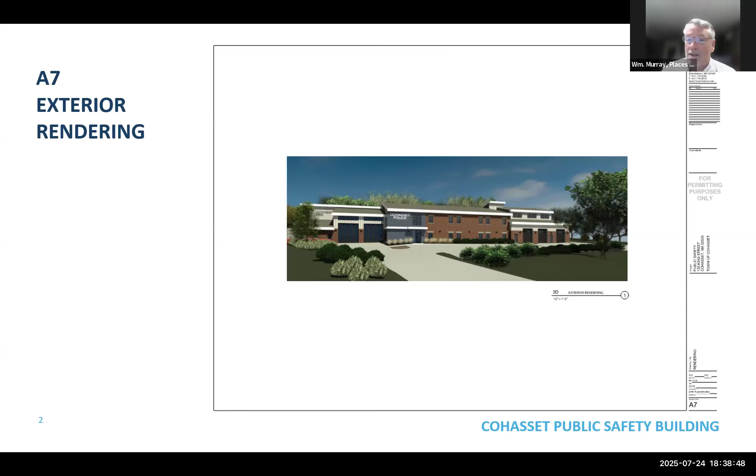Very quickly, some plan views just so you can get an aspect for it. On the left we have the apparatus for the fire department, the dormitories for the fire officers, and operational space. The first floor of the main building will be almost entirely the police department - this will be the holding, prisoner processing area, and the garages.

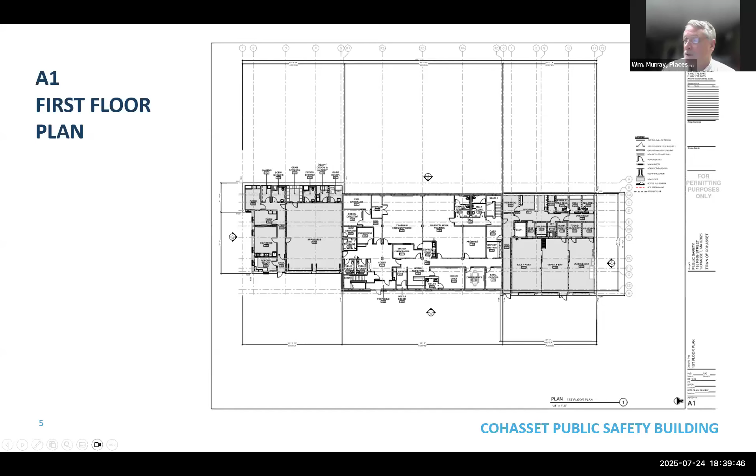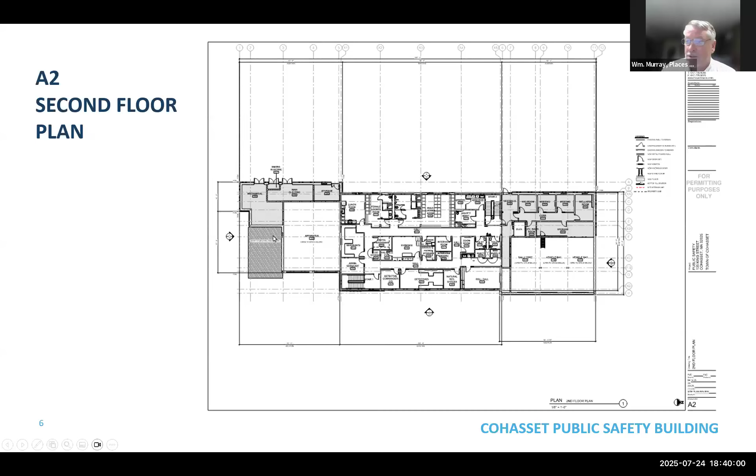The second floor will be various offices, and again the second floor of the main building will be police operations. There's virtually nothing on the second floor other than gray spaces, which are mechanical. There is a third floor on the existing building, which will be renovated, and that's the data storage center that the town will operate - just two very small closet/office spaces.

Here is the site plan. King Street is at the bottom. We're pretty much honoring and keeping the existing pavement that exists to the front of the building, which goes all the way out to the north side. We're putting some islands to give separation. This is all new construction.

At the top of the page, a new parking lot to the rear and a new driveway. In order to build this driveway, you can see this gray line - that's a retaining wall, and we'll have retaining walls on the far side of the building as well, because we're building into this very steep slope.

So the way the site design works out, the fire apparatus will be able to enter and exit - they exit straight down and onto King Street. The police department public parking will be in this area to the front. These two gray areas will be raised islands where we'll have signs, no entry. So from the garage space on the first level going around to the back will be all police operation and semi-secured space.

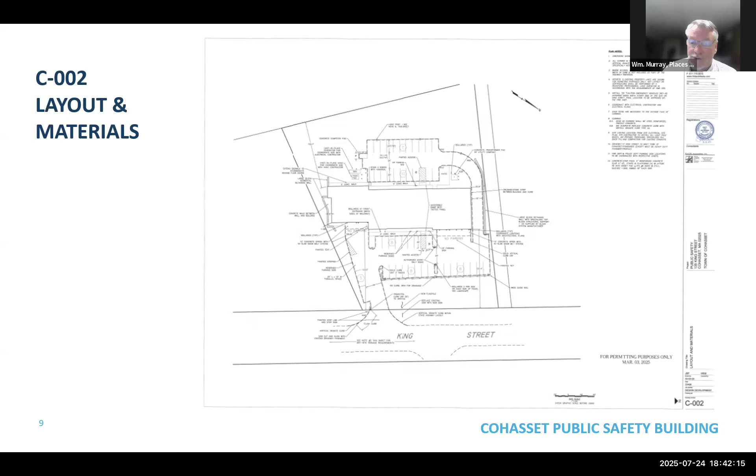The way the site works, I don't really want to get into the site design because it's very hard to read at this scale. I don't know if you all can see it. I think I'll just go back to the landscape plan, if that's okay.

So we are adding, not quite doubling the amount of impervious area - I think we're adding 68% more impervious area to the site, because the existing building is the center block and all of the pavement to the front. The new is the building on either end and the parking to the rear.

We have a lot of problems with this site with soils, and we did present to you that we were doing soil testing across the street, which by the way worked out very well. And we did stay outside the 100-foot buffer zone.

I'm a DEP certified soil evaluator, and I did the test holes out here. We did a couple of tests, three test holes to the rear and one to the front, and the soils were pretty consistent across the site in being a very dense till. I called it a silt loam, and groundwater is anywhere from 3 feet to 4 feet based on mottling, and we actually encountered groundwater in all the holes.

So the soil is not a forgiving soil - it's a very bad soil. It's a very good soil to hold up a building as long as you don't dig it up, but to try and recharge, it's not going to work. We attempted a percolation test and we abandoned it because it was just going too slow. So it doesn't perk - we have shallow depths to groundwater, and it's a very dense type of soil.

So in the drainage design, what we're proposing to do - and I will attempt to get to the drainage design - what we're doing is we're catching through catch basins on the site. But in this upper level, we're doing a below grade detention basin, which is to say these are going to be chambers that are going to be fully waterproof, wrapped in plastic, and they'll be below ground. So we'll be capturing stormwater, attenuating it in here and slowly bleeding it out and discharging to the existing drainage manhole that's down on King Street, because the entire site flows down to King Street.

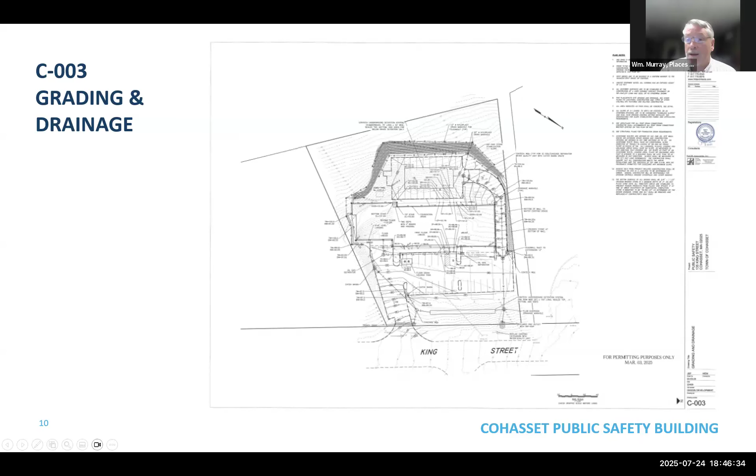So we did do pre-development drainage calculations. The building is here, and you can see that we took into account the offsite flow from what was formerly Avalon, all the tributary areas flowing from offsite. We did a site inspection, and we see that most of these buildings pitch to the front and to the road and are picked up by roadway drainage, but the back half of the building pitches to the ground and drains to the site.

So this is the pre-development drainage, and we have 2 points of analysis. We have a manhole right here, which collects runoff from an existing set of catch basins along King Street. And there's an existing catch basin over here that has a very small tributary area, and we've done an analysis to both of those points.

This is the post-development, so I'm just showing you that we've taken very careful consideration into the design of the site and the stormwater. For the storm events and the points of analysis, you can see post-development on all events, the flow is less than the pre-development circumstance.

And we do note that we cannot use low impact development techniques, which we do try to use on a lot of our public safety facilities, simply because there's no room. We have bad soils, and we just can't do open drainage systems or rain gardens or anything like that on this site.

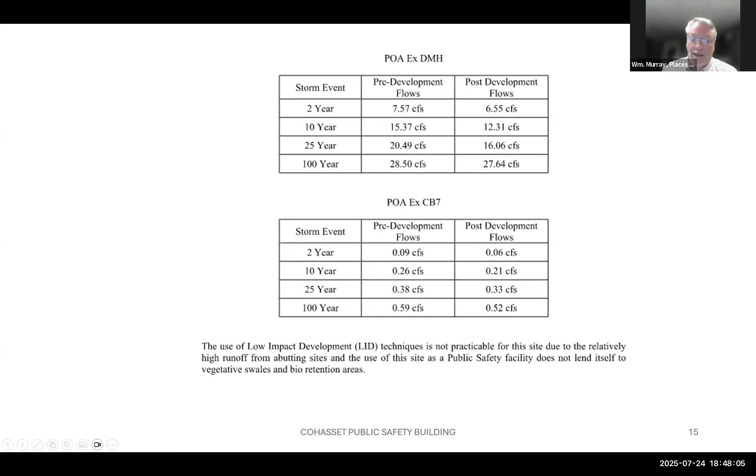So I tried to go through it fairly quickly. As I had mentioned, Charlotte has given us a very detailed set of questions that we already have answers to. This is a design team, so the answers are not generated just by my office, but by the architect, the landscape architect, and some of the other professionals. We will, in all likelihood, have a response to the commission next week for your next meeting to go into detailed response about O&M and some of the other items that Charlotte mentioned in her letter. But I'm happy to take any questions, and I know you have a long night, so I tried to keep it quick. Thank you.

Charlotte, care to elaborate on what your primary questions were?

I can summarize briefly that, as Mr. Murray mentioned, they are requesting a waiver of standard 3 given the lack of suitable soils for recharge. I had some other clarification questions on the rest of the stormwater standards, mostly like illicit discharge statements, and just clarifying that the site's not a land use of higher potential pollutant load site.

I had a lot of comments on the long-term maintenance. Since this is a pretty important public safety building, I just want to make sure all the maintenance is clear and put into the long-term O&M plan. If we can't get a CDS — I think it was a hydrodynamic separator, Contech I think is the brand — if we can't get that, if there's a similar one you recommend, that was one of my other questions. And then I went through each page in the site plan, and most of my comments, as usual, relate to erosion control, limit of work, tree clearing, and site construction management. That was pretty much it.

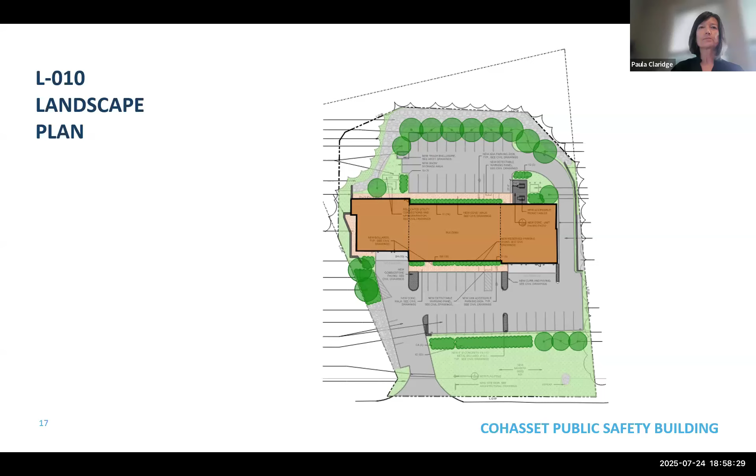Okay, next up we have NOI 25-18 for 30 Beach Street, which is new, so we'll read that in accordance with Massachusetts General Laws Chapter 131 Section 40, the Cohasset bylaws, and the Cohasset Stormwater bylaw. The Cohasset Conservation Commission will hold a remote public hearing on Thursday, July 24th, 2025 at 6:30 for NOI 25-18 to raise the existing dwelling within lands subject to coastal storm flowage and salt marsh buffer zone at 30 Beach Street for Susan and Michael Putziger.

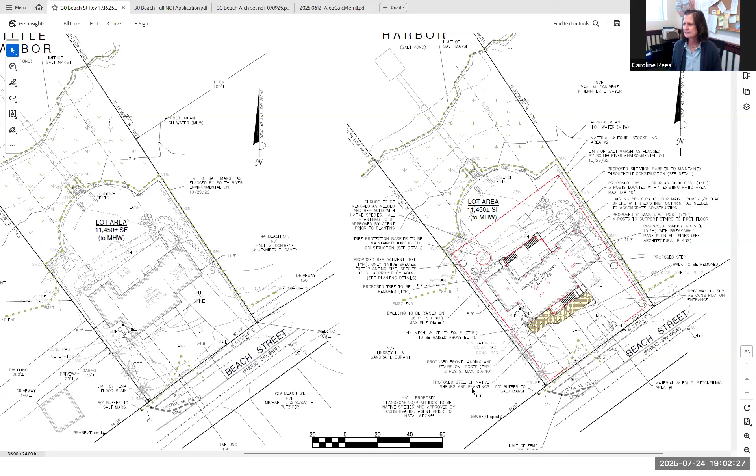They're not changing the shape of the structure per se, just lifting it up. It's keeping its same Cape style, not adding living space, just raising it on approximately 26 steel piles.

Some of the front hardscape will be removed. A front landing and steps will be added to access the elevated structure. And they are proposing a pervious deck off the new first floor, on concrete piles, set within the existing impervious patio footprint.

The raised structure will be surrounded primarily with vertical slats, providing 40% void spacing to allow flood flow to pass through. Under the garage area, there will be breakaway panels, and they propose to park a car underneath this section.

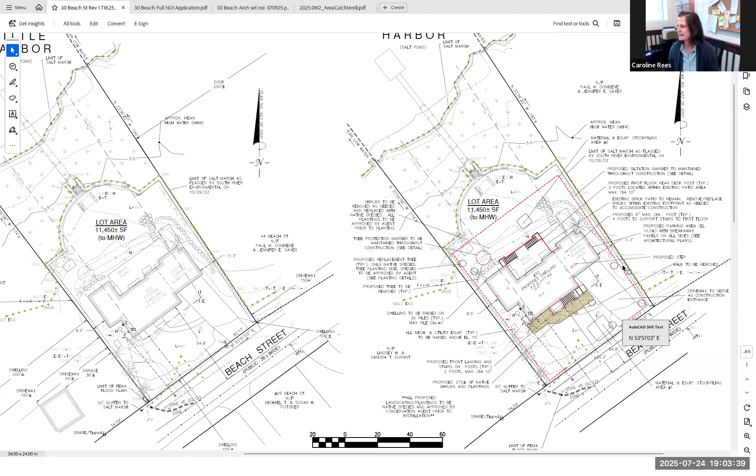To complete the work, we estimate 3 trees are proposed for removal. They're right up against the house. We're proposing 6 trees as replacement, scattered around the structure. They have not been selected, but we request prior approval from the agent regarding species and final planting plans.

And with that, I think I covered most of it. Pretty straightforward. I can show you a picture from the architectural set. The existing structure is coming up with slats and breakaway panels. And I guess with that, I'll open it to questions.

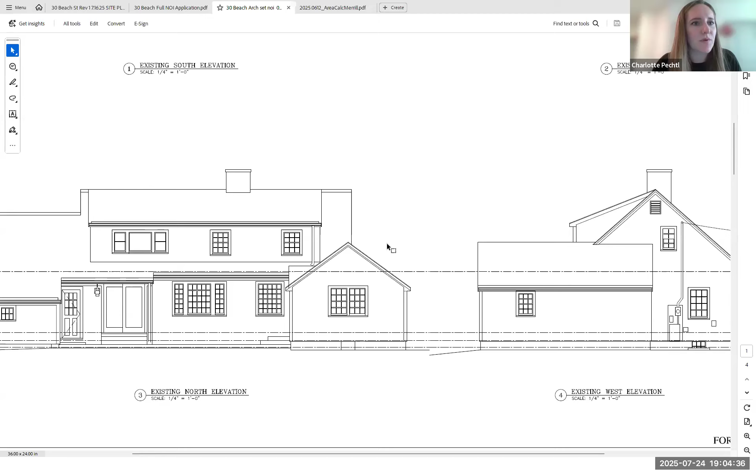Thank you. Charlotte, any initial comments or questions from your site visit? I wasn't able to make it to this one, but I have been to the site previously, so I'm familiar with what it looks like. As you guys may have seen on the site plans, there is an existing stone wall wrapped around the entire property from both right and left property boundaries and the one in the back.

The limit of work is proposed in that red line Caroline's showing, so they're not using the entire site. As you can see, pretty much the majority of the site is in the 50-foot buffer, so a variance has been requested for the work.

In terms of tree protection, we added a tree protection barrier around the existing tree in the back that they would like to keep. My comments would mostly just be on staging and stockpiling, making sure they're not storing things closer to the marsh than what's in the limit of work, even though I know it's a pretty tight site. So I did have some draft comments, or conditions, for that as well.

Mm-hmm. Okay. Tom, any questions? Comments? No, I don't have any questions.

I just commend the applicant for raising it above the flood level. I think that's really a wise thing to do. Kathy, any? No, I don't have any questions. Thank you.

Thank you, Steve. The only question was, this existing brick patio in the back looks like it's getting smaller. Is it just going away, or is it going to sit underneath the raised deck? It's staying the same size, it's gonna sit underneath. What's smaller over it is the proposed pervious deck, because there'll be a deck off the new first floor. So it's not changing at all, basically. It's not changing.

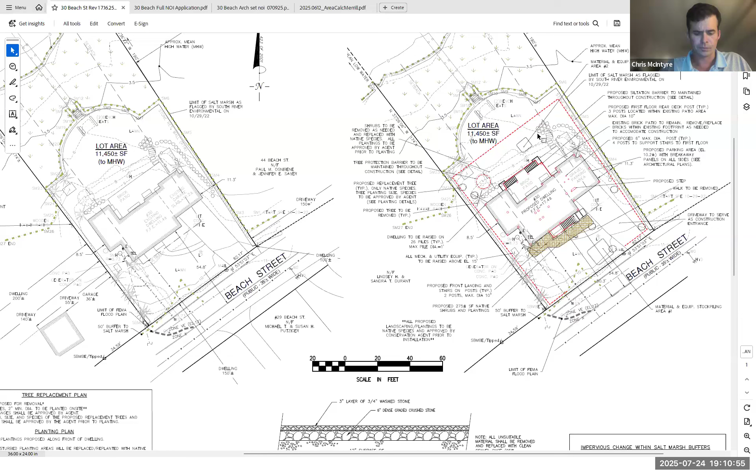Okay, Charlotte, did your drafted conditions have anything to do with the equipment? You want to pull those up? I don't have any further questions. Excuse me, may I ask one question? Oh, Kathy, I'm sorry, did I skip you? It's okay, I didn't have it before, but I just thought of something.

Caroline, on the site plan in the bottom right corner, there's a little box with the heading impervious change within the salt marsh buffer. Oh yes, I should have mentioned that. There's actually a decrease of 45 square feet. That's just the change in hardscaping around the structure. Of course, we have to still account for the roof of the structure.

So the impervious area from the dwelling doesn't change even though it's raised, but the removal of the front walkway and replacement with just a pad gave us a decrease of 45 square feet. Okay, thank you very much. Thanks for pointing that out. Sure.

Charlotte, if you would, show your draft? Sure. So, kind of what we briefly discussed, no staging or stockpiling of materials, fill, or equipment is allowed beyond the limit of work as shown on the site plans. So just making sure they don't use that back area for extra space because it's closer to the marsh.

Tree protections and limit of work shall be inspected by the conservation agent prior to any site work, including demolition, just making sure those barriers and everything are up first before the house starts getting worked on.

One thing I just wanted to note about the trees being preserved along the left border of the property, and then the rear of the property gets its own barrier. Sometimes with excavation, you don't know how big those root mass systems are, so just kind of anticipating if any additional tree removal should be needed.

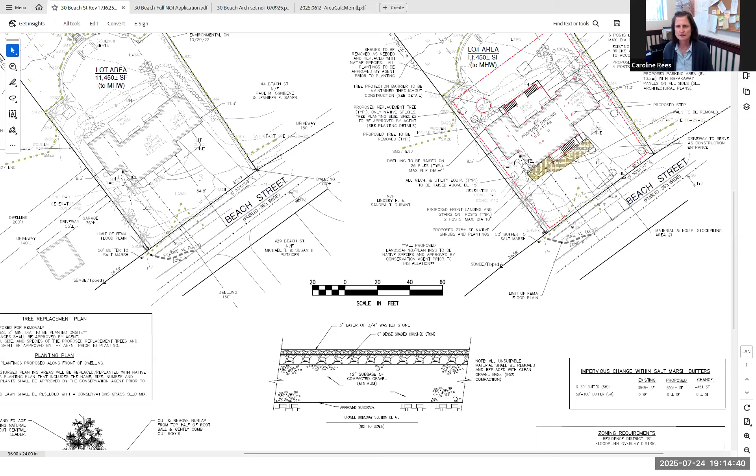Bear with me, I'll try to find the photos. Let me just slide over - I know I have one on my screen. That's not it, I'm sorry. It may just take me a second, I don't know if I need to pull them up in the file.

That's all right, if they're - that sounds like a pretty typical small coastal tree. I think I'm fine with 2:1, working with Charlotte to replace in kind at the 2:1 ratio, unless any other commissioners have any concerns or questions in that regard.

This is the tree on the right side of the property, so you guys can see it. Let me stop sharing - oh, that's all right Caroline. I shared over you, sorry. Yes, that's the one, they're all similar. Most of my pictures are of the marsh, but the one on the right-hand side I believe is an eastern red cedar. Sorry, I took most of my pictures of the marsh because this was a dock project two years ago.

So, what's the age of the wall structure on the three sides? Do you have any idea when that was built? It's kind of unique. I don't personally know, I don't know if the owners do - I'd guess it looks pretty old.

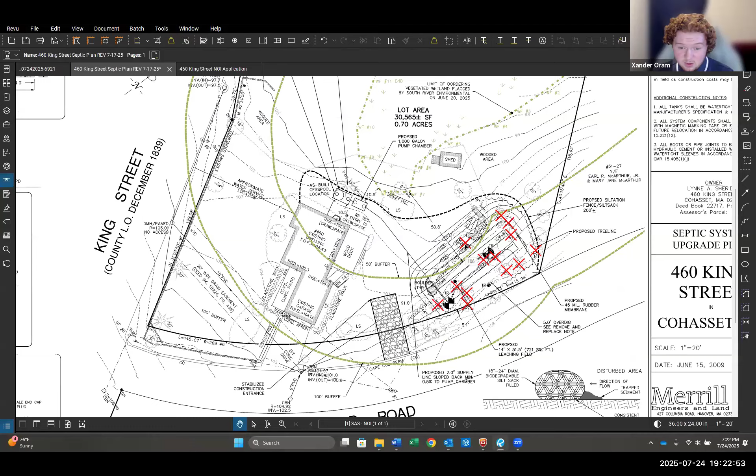There will need to be some trees removed, about 13 trees, unfortunately, but this is really the best and almost the only spot this can go, due to all the constraints. Keeping it out of the 50-foot buffer is obviously ideal. That's the way this project went, and that's why it was approved back in 2009, over 15 years ago. That's about it. If there's any questions, I can answer them.

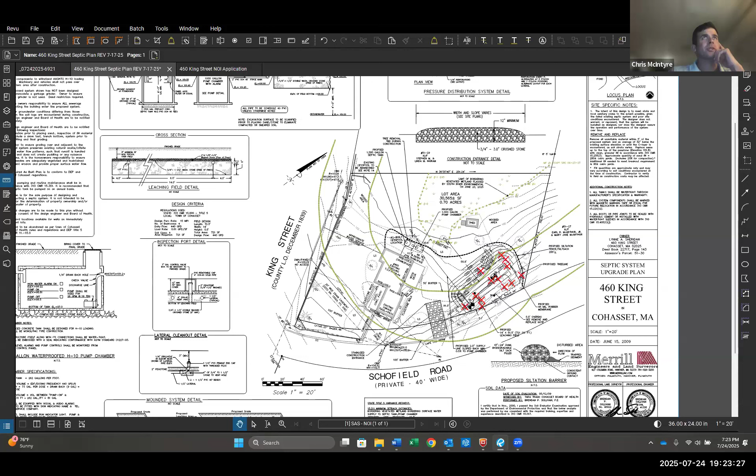Thank you. Thank you. Charlotte, what do you have for this one off the bat?

So as you guys know, they've requested a variance. I did go to this site and looked at it with Lynn, and as you guys can see, it's a pretty tight site. The soils up in the front did not perk, I believe. Xander, correct me if I'm wrong. Yeah, up in here, they did not perk.

So I guess my main question, and commissioners can weigh in here since you're the ones looking at this and voting on it: I don't know if it's a trade-off to either save the trees in the 100-foot buffer and move the leaching field further into the 50, since you can't avoid the 50 entirely, or if you're okay with them wedging it into this far corner as best they can to keep the work out of the 50. So it's more of a trade-off discussion: do we want to reposition it to save some trees, or is it okay staying in that corner as far from the wetland as possible?

I had similar comments on limit of work and tree protection barriers if we need them. It looks like they've already put the erosion control barrier around most of the trees I would want to protect, but maybe inching it toward that other smaller one where the existing riprap is. Other than that, those were my comments. Yeah, tightening this a bit. Yeah, we could do that.

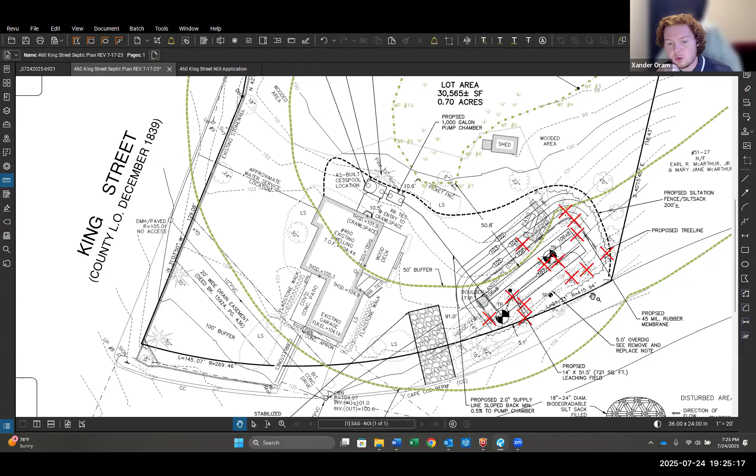13 trees. Yes, 13. Is there opportunity for replacement elsewhere? Probably, at least. I mean, some of them, I know you have usually a 1-to-1 policy, 2-to-1 in the 50, if I'm correct. It would just be a little, it might be hard.

That would be 15 trees. That might be a bit much, but I haven't had the chance to discuss that with Lynn, so I'd like to see what she would think, like how many trees she'd be willing to do.

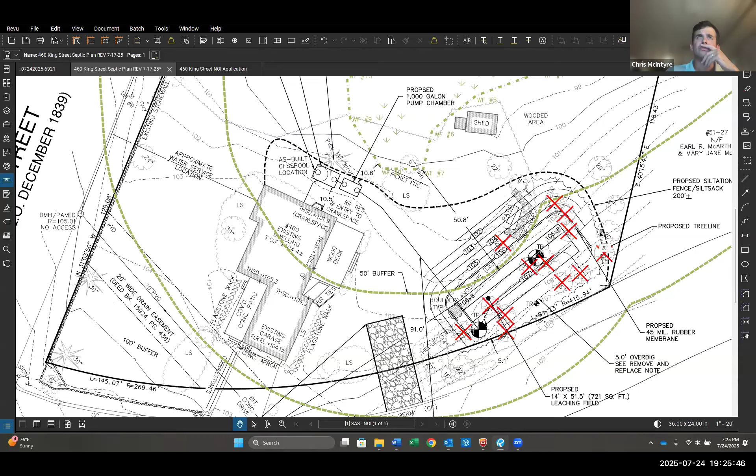So do I comment at this time? Sure, yes, if it is—I don't know, it's for the commission to decide. If it could come a little more forward, so not 13 trees are coming down, that would be my preference.

Yeah, it is heavily wooded as it is. I don't really know where we would put those additional trees. There's a grove on the side of the house, there's backwoods, and then there's the woods along Schofield Road. So I'm in a very heavily wooded area, which is lovely. I'm not quite sure where we would put in that many trees, to be honest. I just don't know where they would go.

Okay, basically the open area is the current backyard, and that is it. Everything else is woods.

Okay, let's go through the commissioners. Tom, any questions or comments? Yes, I think it's really essential that we keep this drain field as far away from the wetlands as possible.

And I think that this is really the only site that's going to work. And if we lose some trees here, I think that's better than trying to relocate it closer to the wetland.

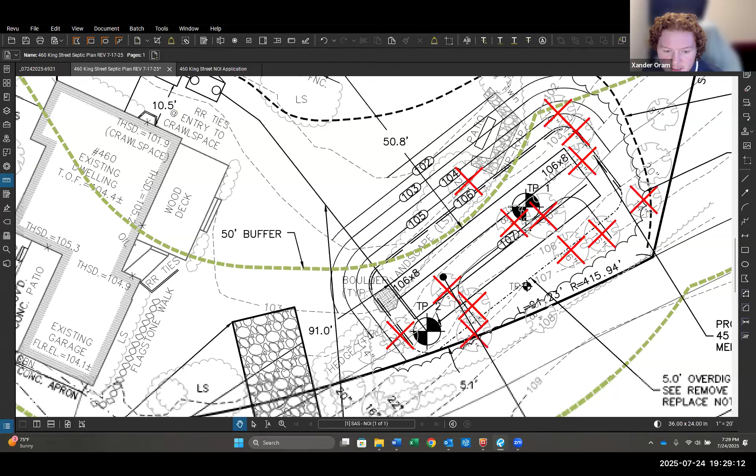Xander, do you have any details on the caliper sizes of those trees? Yeah. So I think the largest one we have is a 22-inch, and then it goes—we have a few that are 16, 12. I think that says 14, 16, 16, 10, 20, another 20 here. So 22 is the max, and it goes all the way down to like the 8-inch over down here.

Sanjay, any questions or comments? Yeah, once the leaching field's in place, what will be put on top? Like, will it be lawn or grass? Could we get some native species in there? Maybe some sort of seeding could be done. We'd just be careful about anything with a root system that could potentially penetrate the field.

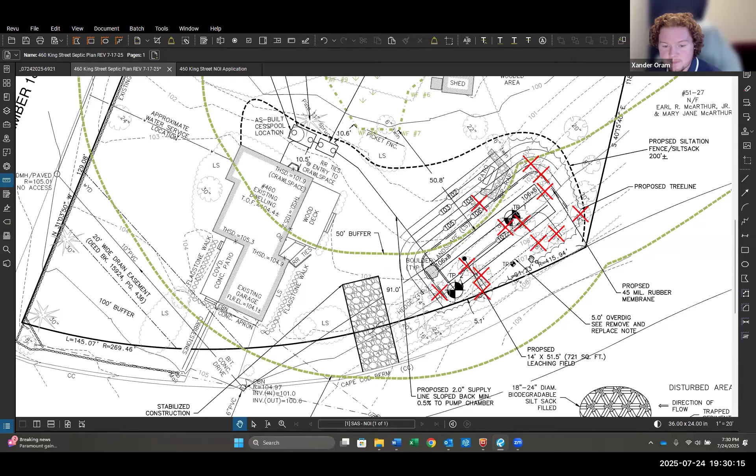So it might be hard. Lynn, were you planning on just putting lawn there, or did you have something in mind? My understanding was we should be careful with the root system, so it was lawn—that's kind of what I'm thinking too, we want to be careful with the root systems. So I think we were just planning to do lawn, yes.

Well, there are native species that would have shallow root systems, things like right on our list. So this could be—I think the conservation seed mix here could be used successfully without compromising the cover. Okay, so maybe just a seed mix above the system is what you're thinking. Yeah, that's interesting.

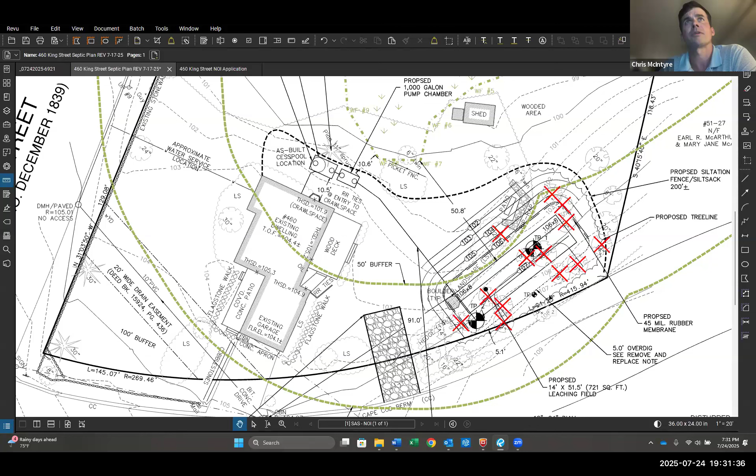Yeah, I for one would like to see some effort to plant trees elsewhere on site, whether it be within the 100. I'm trying to pull up the Nearmap, but just the way the plan is, I'm having trouble orienting myself. But it looks like around the shed there's open space for planting. Is that accurate?

Behind the shed and to the right of it is already well treed. There were a couple of trees that came down because they were no longer healthy, but it's all wooded from behind the shed—that whole area labeled wooded. It's behind the shed, to the right of the shed, all the way over to our abutters, and the abutters on the other side as well. There's no open land there.

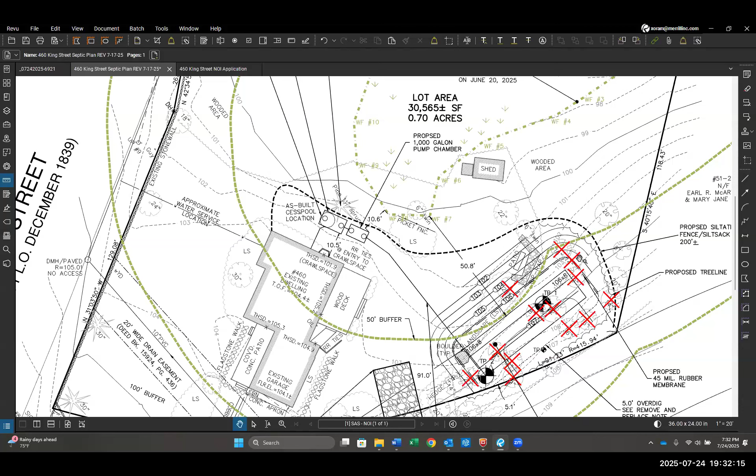Charlotte, can you pull up the project map as you have it in Nearmap, please? Just zoomed in on the plan as it is zoomed in.

I can't quite orient myself, but what I'm looking at on Nearmap from April 10th, 2025 looks like there's opportunity for some trees, and I understand this plan was approved. When did you say it was approved? 2009.

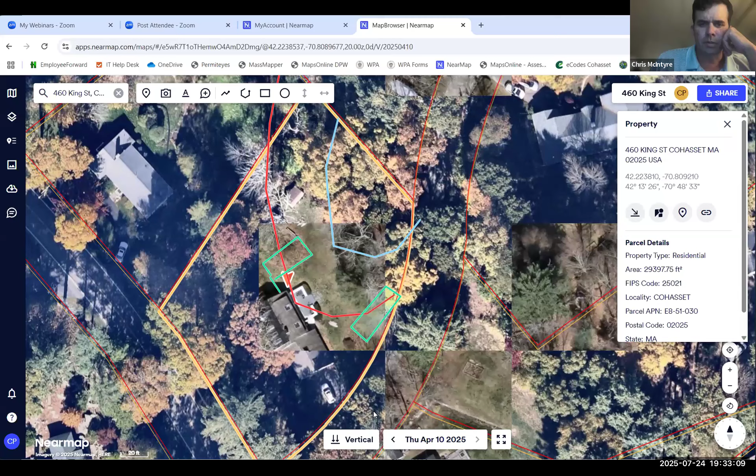Right, so I think our tree replacement approach has changed somewhat, and as this is now up for reapproval, we'd like to be as consistent as we can with tree replacement. So Charlotte, there's two squares here, and the one more southeast is the current proposed, right? So that's where the system they would like to put it?

Yeah, sorry, I was trying to draw this roughly. So this is the approximate location for the septic tanks, and this would be the approximate location for the leaching field. This isn't accurate compared to Xander's plan, I was just trying to draw it roughly.

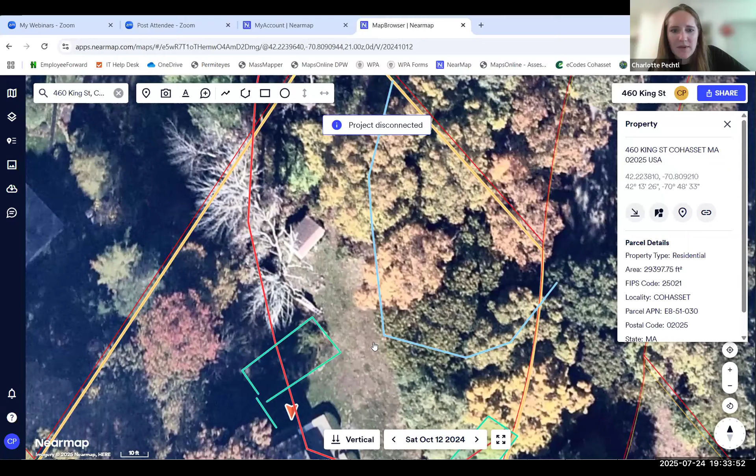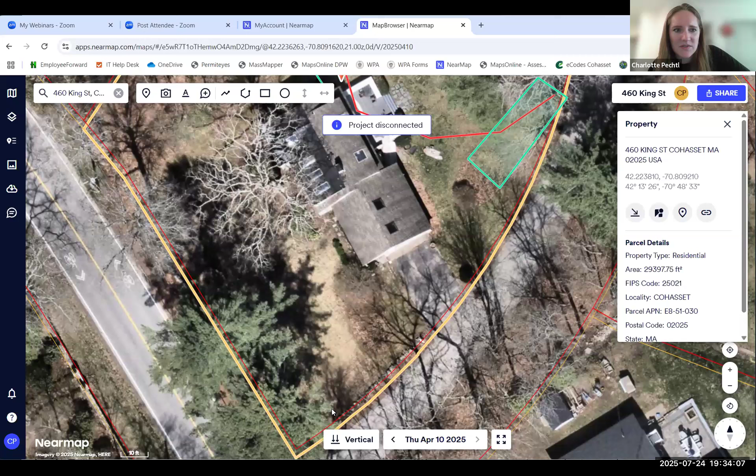Looking at the site, there are already a lot of trees here. So if this chunk's coming out, maybe shifting them into this corner might be possible. I'm trying to see if there's any space with canopy - there's a couple spaces right here. As long as it's not impacting any easements or utilities, they could possibly go in there. This area is still wooded, so I don't know how many trees we can squeeze in here. Maybe a little further out, but you'd have to be mindful of the tanks here, maybe back here potentially if we can find some space.

Charlotte, I can't see anything of what you're talking about. Oh, can you guys not see my Nearmap? All I see is the black and white plan here. Oh, I see it now, yeah, I can see it too. Not sure, I'm still looking at Xander's plan.

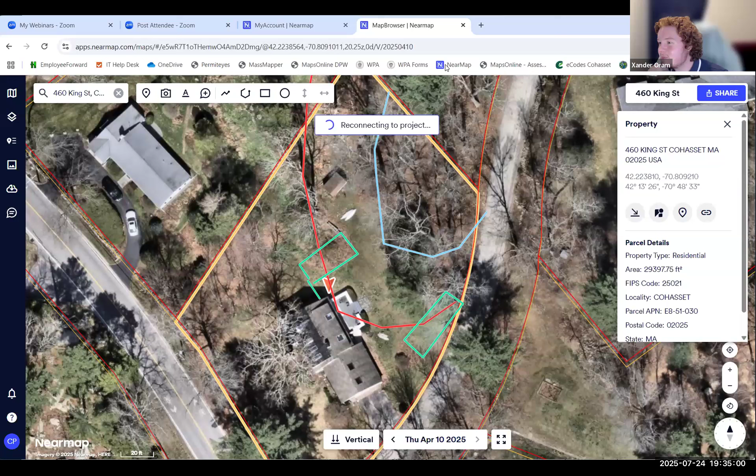Xander, I think multiple people are sharing. Would you be able to stop sharing yours? Okay, stop - does that fix it? That fixed it. Okay, sorry, sometimes with multiple people sharing I don't know how it works. No worries.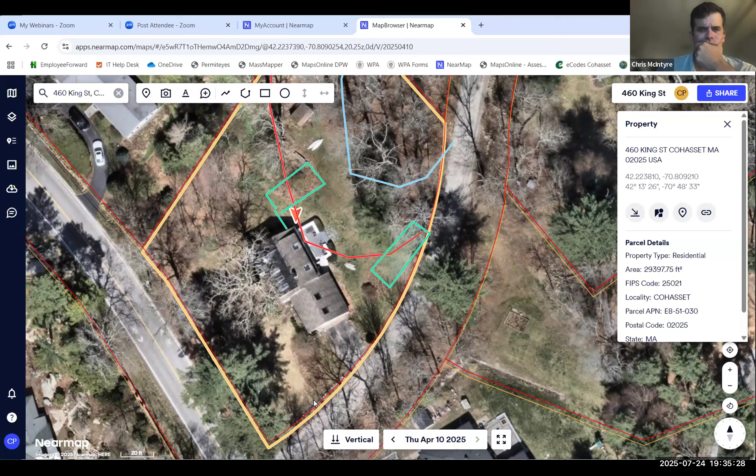I'm happy to work with you on that. Again, it's just that our strategy, our approach, maybe not our official policy, but we've changed a bit since 2009 in terms of our attitude towards tree replacement. So I'd be interested in exploring all opportunities to replace trees, and I think if the rest of the commission's okay with the applicant working with Charlotte on that, it'd be okay as well.

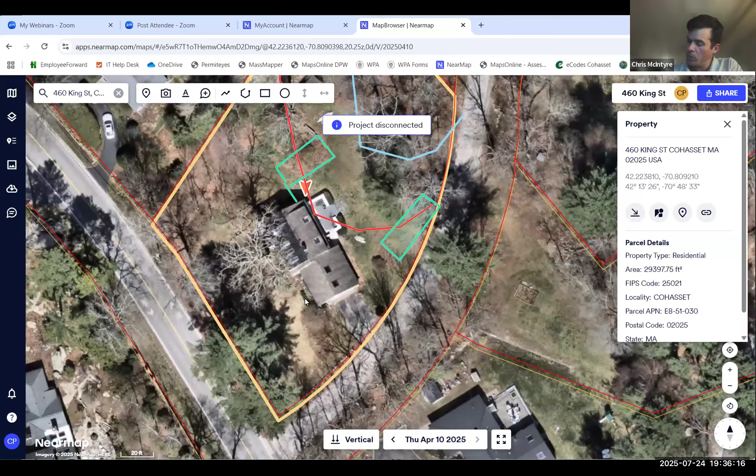Any other comments for commissioners? Questions? Nothing from the audience, Charlotte. What do you have for draft? I don't see anybody with their hand raised. No comments, but I can share the conditions I just typed or modified for you guys.

So the first one was: limit of work shall be inspected by the agent prior to any site work. Xander, if you're okay with tweaking the plan to just include that extra 6-inch tree, do you want me to put it as a condition, or do you want to just send that to me? Whatever works better for you. I can get that to you first thing tomorrow.

Okay, that's fine. Does the commission want a condition on tightening the erosion control just to protect that 6-inch tree, or do you guys just want me to work with Xander on that? Shaking your head, Chris - sounds like you're good. I'm fine with that, yeah.

And then native seed mix shall be selected to install in the leaching field area once the system is installed. The specifications of the mix shall be reviewed by the agent prior to installation. And I can send, Lynn, I can send you some examples.

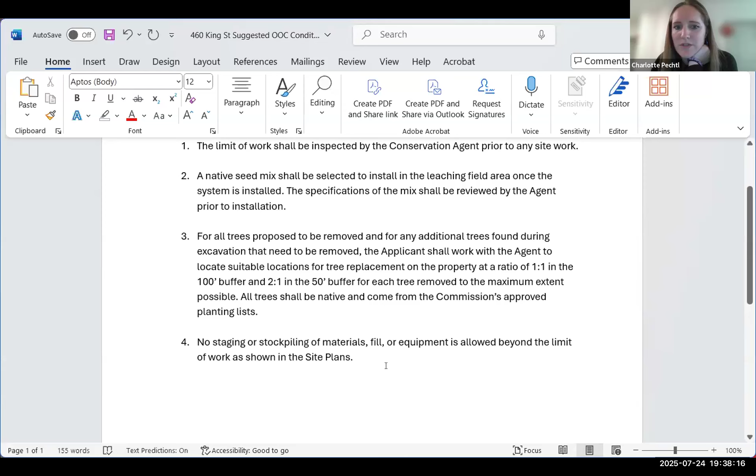And then same condition as the previous project: no staging or stockpiling of materials, fill, or equipment is allowed beyond the limit of work as shown in the plans. Just so we don't see people going around the barriers and putting stuff near the shed or something like that.

Good. Anyone care to make a motion then, if there are no further questions? No? Okay, then I will make a motion to approve NOI 25-17 for 460 King Street. Do I have a second? Oh sorry, Chris, is it with these conditions as shown or read? Yes, with the conditions as shown. Second.

Okay, then with the motion and a second, I will take a roll call vote. Tom Bell, aye. Steve Magnell, aye. Kathy Berrigan, aye. Sanjay Fernando, aye. And Chris McIntyre, aye.

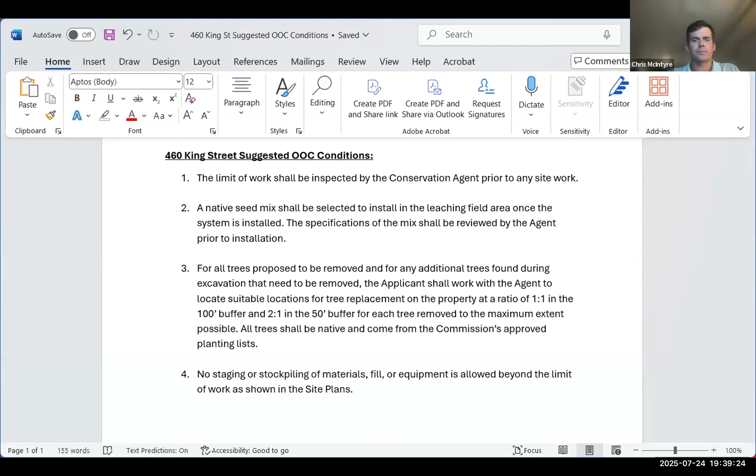Do we need a variance here, Charlotte? Yes, for the small amount of work in the 50, and then the obviously temporary disturbance during construction.

Right, okay. I make a motion for a variance within the 50 at 460 King Street. Do I have a second? Second. All right, with the motion and a second, then I'll take a roll call vote.

Tom Bell, aye. Steve Magnell, aye. Kathy Berrigan, aye. Sanjay Fernando, aye. And Chris McIntyre, aye. That vote passes 5-0.

Thank you. Awesome, thank you guys. Thank you. Thank you. Great. Have a good night. Good night.

Okay, is anybody else having trouble loading projects on their map? It's slow, yes. I don't know if there's some sort of network issue. I'm having trouble loading mine too. Okay, maybe there's too many of us on it. Usually that's not a problem. Yeah, I'm having slow loading speed as well.

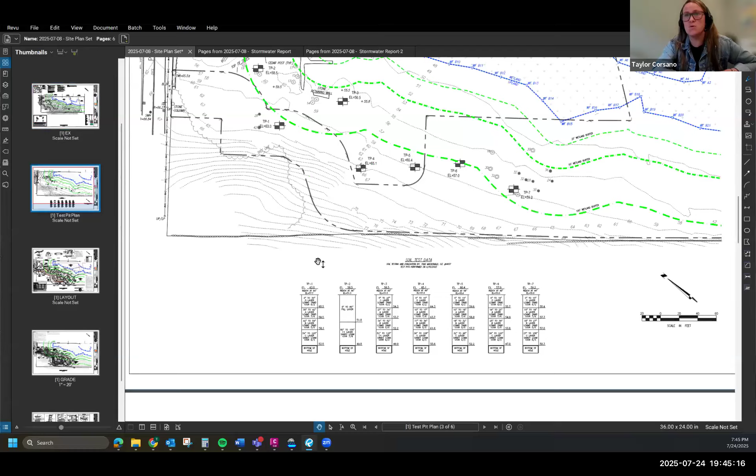The applicant is proposing 2 single-family homes, one located on 40 Pond Street and one on 46. The applicant is proposing a shared common drive to service both homes, proposed at 16 feet wide, which services 40 Pond Street with the driveway located here and 46 with the driveway located here.

We did submit a common driveway application to the planning board. We'll be in front of them in August, and we did just receive peer review comments back from them, so we will begin to address those as well as comments received from you all tonight.

The proposed drainage for the new driveway is serviced by 2 rain gardens, one located between the 2 homes and one in the front northwest portion of the site. This configuration allows us to better manage the steepness of the site by installing some retaining walls to flatten out and improve the steepness and runoff as you go down the site.

The houses are also proposed to coincide with the topography by having walkouts. To treat the roofs of the homes, we have 2 proposed underground chamber systems, just for the roofs, as well as some over here. We have proposed utilities connecting out to Pond Street, which will service sewer, water, and electrical.

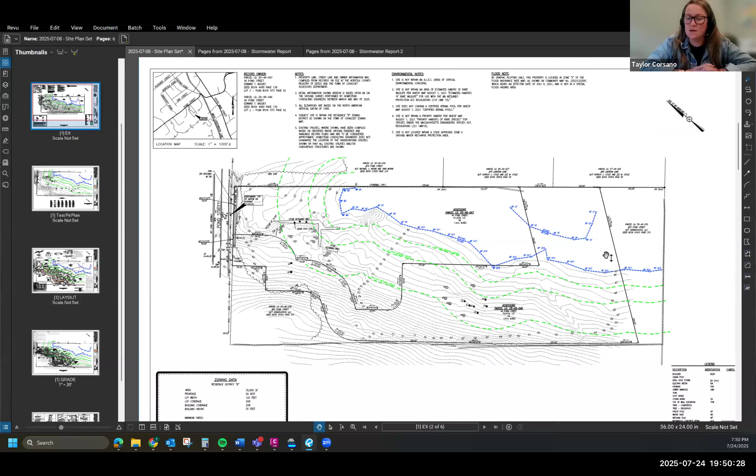So there's no tree schedule at this point, or? Not at this current point. We do have a couple of trees located, but we'll get you a more detailed tree schedule.

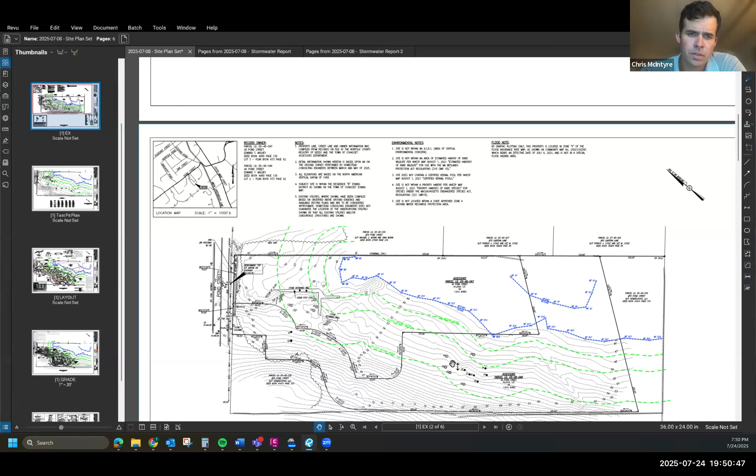Okay, Charlotte, what's the gist of the abutters' feedback? Can you speak to that? Sure, I'm not sure I can do it 100% justice, but I know the letter did touch on a review of wetlands, wildlife habitat, stormwater impacts. It seems like they are suggesting that we look at the potential impacts of all proposed structures, the driveway, the sewage, the infrastructure on the wetlands, water quality, and wildlife habitat.

Recommendations on preserving the area's ecological integrity, conducting a formal wetlands assessment of the properties at 40 and 46 Pond. They've also provided additional information related to humidity and impacts on severe storms. Overall, they're concerned about stewardship and long-term impacts on the site, and the project's impact on water quality, flood control, and wildlife habitat.

Given these well thought out comments, I had recommended to Taylor in a pre-application meeting, and also in my comments for the commission, to possibly consider two things. One would be a site walk. I have not yet visited this site, and I think it would be helpful to look at it visually since it's new development, to see where the flagged limit of work is relative to the 50 and 100-foot buffer, where the driveway and houses are going to go, and just seeing the site that's out there.

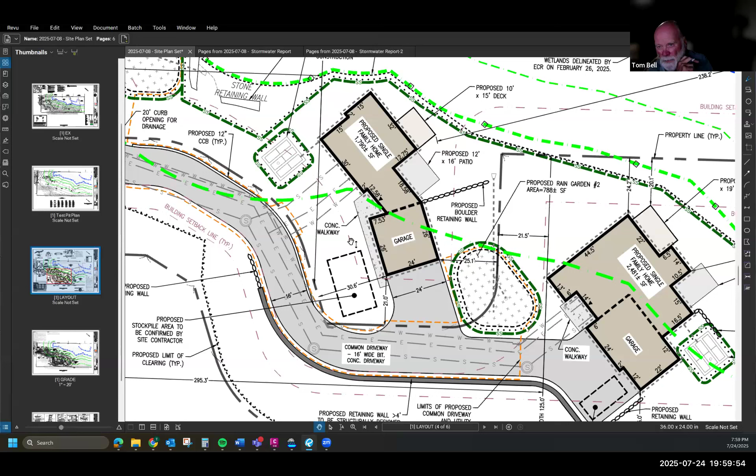For this one? For 40, that's correct. So 40 is pretty tight, as you can see - this is the building setback line right here. Oh, wait a minute, you've got another building setback line. So these are two separate properties, each with their own setback line. They just share a common drive. I see, yeah, to eliminate.

Okay, I wasn't paying attention - it's a confusing property boundary. Yeah, so the property boundary, the lots themselves are configured a little different - lot 40 is located a majority in the wetland. When was this lot subdivided into two lots? It was subdivided back in 2015.

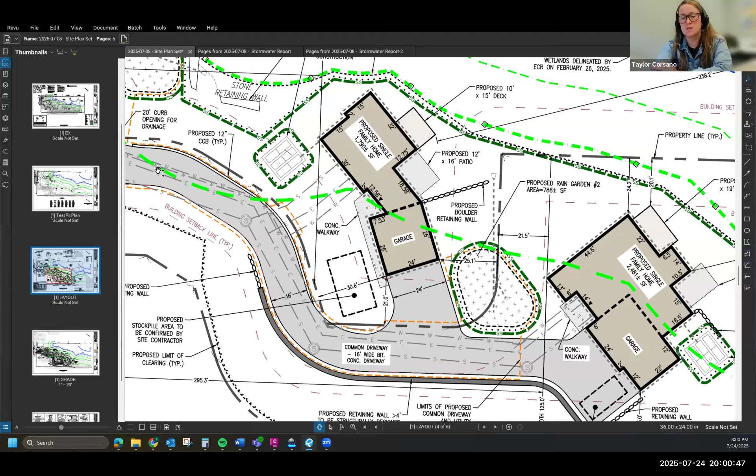So that's why the applicant is proposing the common drive, because on lot 40 we're able to eliminate a lot of the disturbance in order to get a driveway within the property.

Center up on that lot 40 residence again, please. Do you want me to highlight the property boundary for you? Oh, I can see it now, clearly. So I'm looking at the setback line and see what it's doing. Yeah, boy, it's really constrained. It is on this site - that's one of the main reasons the house was proposed where it was.

Okay, well, you've got a little bit of room there - you can move it somewhat out of the buffer. Yeah, I'd say it should be moved the maximum amount possible out of the buffer, consistent with your building setback. Yeah, on the side it is a little bit, and similarly the driveway crosses the 100-foot buffer, I guess on 46. Yeah, I do think we could look at a different configuration to try and push that driveway a little bit out of the buffer.

Okay, good. How wide did you say the driveway was? 16 feet, we're proposing, correct. Is that a minimum standard? I believe the minimum is 12 feet for a common driveway. We went just a little bit larger. So maybe you should consider a 12-foot driveway then - that'll help you. Yeah, we can definitely do that.

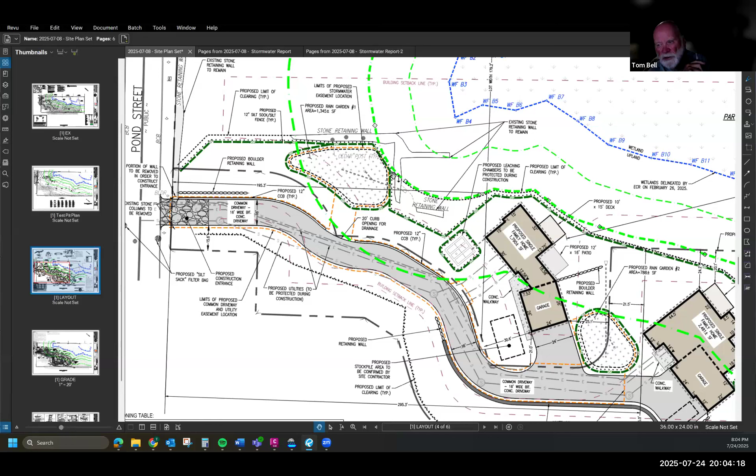Is it a retaining wall or an old farm stone wall? I think it's definitely more of the old farm style kind of wall that's been there for a very long time - basically where a field was cleared and it's a pile of rocks. No, it's definitely at one point it was well constructed. It's got a face to it and everything, it's a clear cut. During a site walk, you'd be able to clearly see it.

Okay, I'm all in favor of us going out and having a look at this. It's a complicated site - we're really talking about serious encroachments into the 100-foot buffer. So I'd like to go out there and have a look so I understand the constraints a little better.

You said the wetlands delineation was done in February? Is that right? Sorry, is that correct - oh, is my thing not working? Yes, you're correct.

Tom, anything else? Yeah, I'm just going to ask Charlotte whether this wetland was a potential vernal pool based on the state. Not based on the state. There is a vernal pool southeast of it on another property, but this wetland was not flagged by the state as a potential vernal pool.

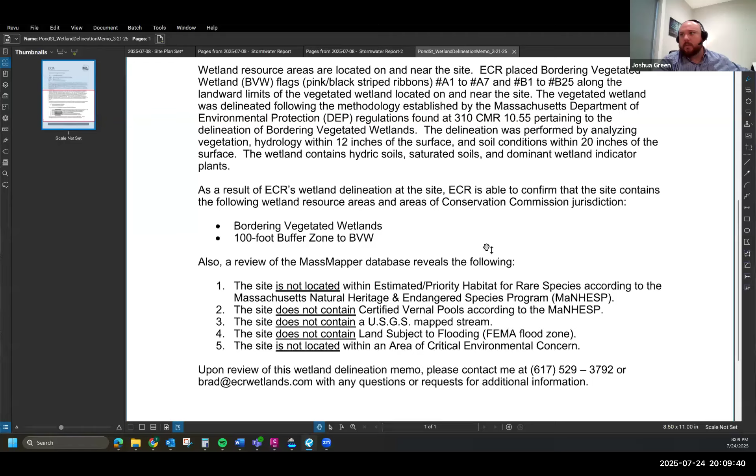And sorry, you're wondering about the soils? Really, the methodology for the wetland delineation, and if they evaluated the soils as part of that, and the soil type, to determine if it reflects the wetland. In the wetland memo submitted, he states he analyzed the vegetation and hydrology within 12 inches of the surface, and soil conditions within 20 inches of the surface. The wetlands contained hydric soils, saturated soils, and dominant wetland indicator plants. I think it's being shared now. Thank you.

I think Tom asked many of the questions I would have about building in the buffer zones. It looks like there's a fair amount of area still within the building setback lines, and I believe driveways can certainly be closer to the property lines than shown here. So there seems to be some opportunity for reorienting things so they're not in the 100-foot buffer. We've probably got most of the housing within that buffer, and it just seems a bit much for my taste.

Agreed. Thank you. Anything else? I agree, I think Tom did a good summary.

I would echo that. For myself, I'd like to see as much alternative consideration to removing structure and driveway from buffer zones, exploring the setbacks. I don't know if there's a setback from side lot lines for driveways in Residence Zone B, but there is. Just making sure we're looking at that closely and getting out of the buffer zones as much as we can.

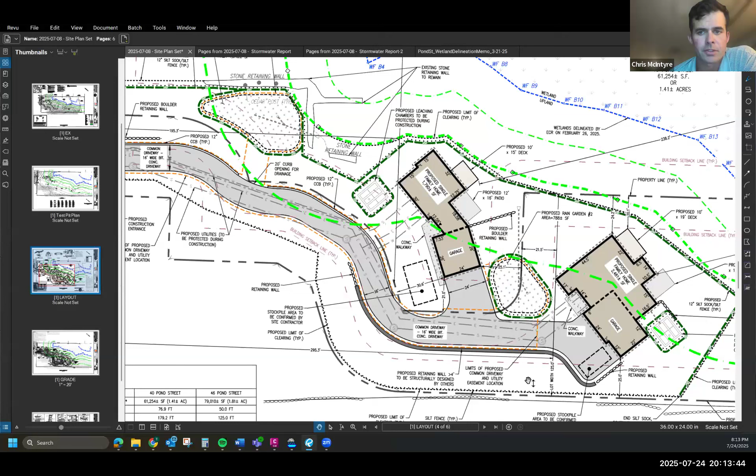Sometimes it's a safety issue too, like if it's an undisturbed site, owners may not be comfortable with that. But if the commission is okay with just our standard site visit setup, that means no deliberation on the site, and all the input would be brought back to a following public meeting, like this one. I think that makes more sense for this.

I have another question. What zoning district is this in? Believe it is Residence B. RB, so it looks like your side setback is 20 feet. Correct, your side and rear is 20 feet, not 30. Oh no, I was saying the driveway itself today is located 30 feet away. I misunderstood you, the setback itself is 20, yes. Yeah, that's the building setback, but it's not the driveway setback. No, I don't think there is a driveway setback, but I can confirm that.

Yeah, there is, I think it's 5 feet, but it might depend on the zone. It is 5 feet. In every zone? Yeah. Perfect. I would confirm that, but thank you.

All that information would be, let's have that all clear, and that way we can all be on the same page and maximizing our proximity to the neighbors and not the wetlands. So...

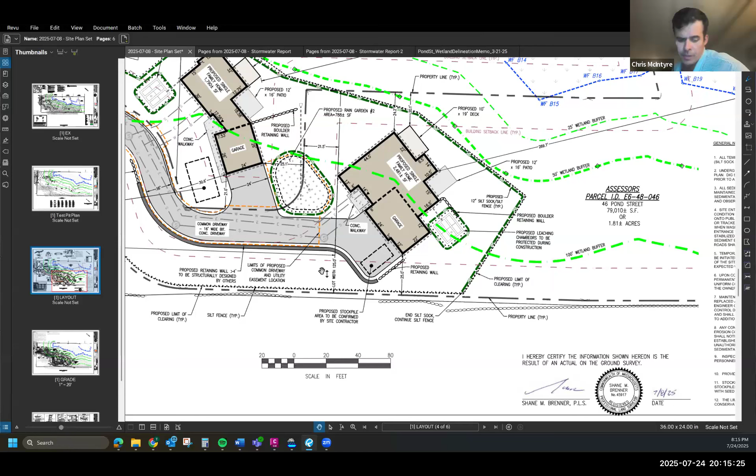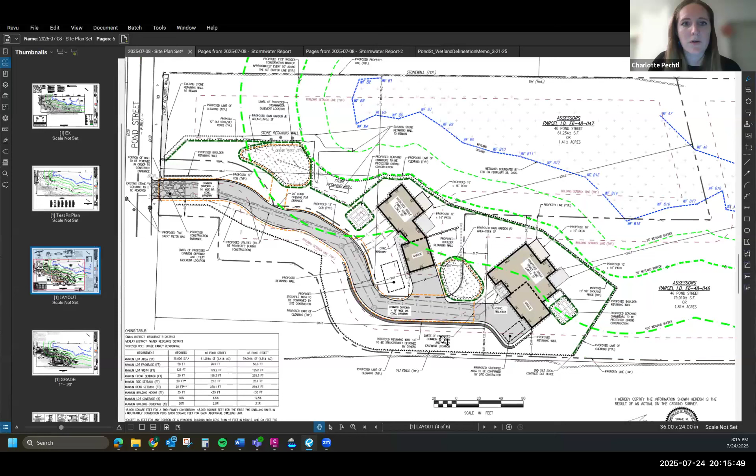Looks like there's a comment, Charlotte, in the Q&A. Yeah, so I think some of the neighbors did have questions. I don't know if the commission has any additional input, or if we want to move to public comments. Anyone, commissioners? I don't have anything else at this time. No, neither do I. Okay, and I actually do have someone raising her hand, so it might just be easier to allow her to speak, if that's okay, Mr. Chair. Sure, okay.

Hi, Mary Jo. Thank you very much for acknowledging our concerns in the petition. My name is Mary Jo Larson.

I live on 12 Virginia Lane, and our property pitches into the ravine. I see there's a recognition that there are many slopes, a downward slope throughout this area. So we really see this as a ravine.

I'm grateful to understand that 50% of the 2 lots is actually unbuildable. It's interesting for me to think that we're still going to try to ambitiously put 2 houses, 2 garages, and a 200-foot long common driveway into an area where there was just one house before, and that house has been remodeled, but that isn't my comment.

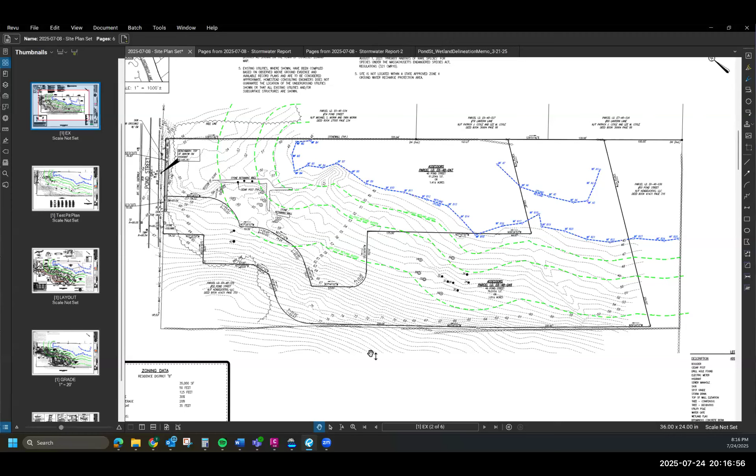I'd like to draw your attention to the image that shows the retaining wall that is behind lot 46, the house 46, that thick retaining wall. I don't know how long that is, but just to give you insight from the perspective of a neighbor, that

area behind the retaining wall is steep, sometimes 45 degrees steep. So we're all up on a hill. My main point right now is to focus on that retaining wall. That 4-foot wall will pose a significant risk to our property at 12 Virginia Lane, and possibly to our neighbor's position downstream, because our home is situated on a sloping hillside.

When you come visit, you should also take a look at Virginia Lane, where I don't see a great deal of care in trying to contain water runoff within the lot lines. I'd like to ask you to draw back your lens and look at the wider context, because our home is situated on a sloping hillside during severe storms, such as the 4 to 6 inches of heavy rain that just closed sections of I-93 in July and stranded cars.

Stormwater runs from Virginia Lane and pours down our long driveway into our backyard and right down into that ravine. Right now it's a ravine, and in summer it's probably much more flooded than in February. My major concern for ourselves and our neighbors is that when the water comes rushing down, that 4-foot wall, however long it is, will block the natural flow of rainwater from our driveway or driveways into the ravine and watershed, especially during severe storms.

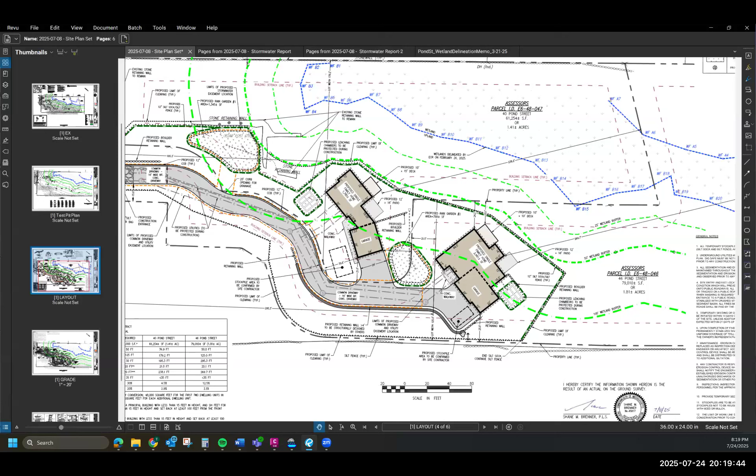Thank you. Yeah, we'll certainly look at that, because the topography on the plan sheet is not very clear in this plan, which we will look at. Thank you. Is that better? Yes, thank you.

I could chime in a little bit to maybe alleviate some concerns, but it is sloping down, so there would be no effect on abutters at the top of this hill, as everything is sloping down. That's what these stormwater systems are designed to handle, that stormwater flow coming down the hill.

And where will it go? Well, it'll come rushing down. By the way, there's erosion from that water going down all the time. So if it creates a river, it's going to start going downhill for sure, rushing downhill, and it will erode the area.

There's a steep incline behind our home. It's a major concern for us. I plant trees on our property to protect it from the degradation that comes with heavy rain. So it is a risk to us, for sure.

Yeah, sorry, I didn't mean it's not a risk, I was just trying to alleviate some of your concerns, hopefully. But just to note, on your letter there wasn't any contact information. I don't know if you want to provide that to Charlotte, because the applicant is happy to meet on site too, to discuss some of these concerns with you.

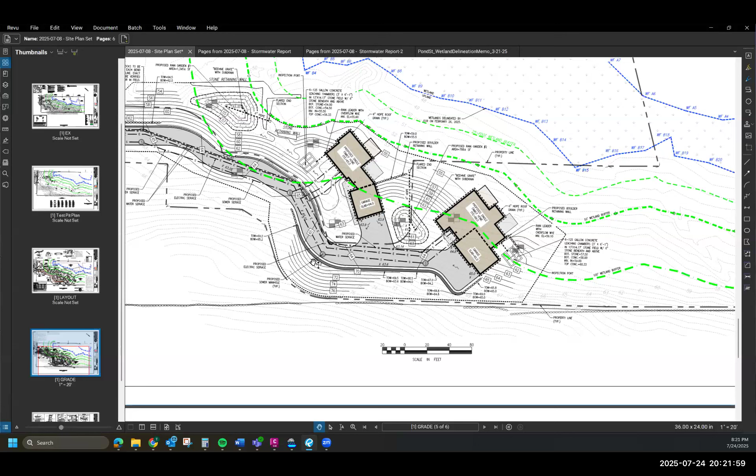Any other commissioners have any questions or comments before we continue?

I don't have anything else at this time. I don't know if it makes sense to have a specific date in mind, but we should certainly schedule a site visit. I think maybe we do that and then continue. Is that okay with the applicant? I don't know how much time we need to flag what we've requested, and Charlotte can specify what we'd be looking for.

I was going to ask Taylor, I can send you a list of the information we'd be looking for. I think Chris and Commissioner Tom both wanted to see inside that limit of work, seeing which trees are also coming out.

So given that list, which I can send you, do you think you need more than a few days? If you guys need a little longer to set that up, I'd recommend we continue to August 7th, and we can always move it to the 21st if we have to, or if you're comfortable just playing it safe, continue to the 21st, given the time to set up the site, have the visit, and revise your plans.

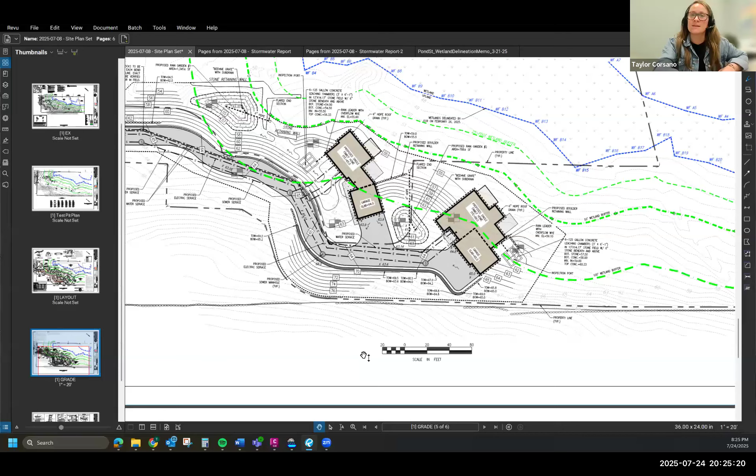Well, next up we have NOI 25-12 for 94 North Main Street, continued from June 5th, 2025, for construction of a fieldstone retaining wall to stabilize an existing coastal bank within land subject to coastal storm flowage along the northern property boundary at 94 North Main Street.

Hey Jeff. Hi, good evening everyone. Jeff Hassett here with Morse Engineering. If the applicant Bill Henry is on the call, if you could promote him as well. Yep. Okay, yeah, I got him. He's just unmuted, or he's muted.

Okay, yeah, so this is a second hearing for an NOI for a fieldstone retaining wall to stabilize the toe of a bank at 94 North Main Street, and I'll go ahead and share the plan.

All right, so, sorry, 94 North Main Street. North Main Street is at the southerly side of the property. They have a paved driveway that comes to a detached garage with a walkway to the single-family home. In the backyard there's a pool area, a small lawn, and then a vegetated slope down to the salt marsh and beyond to Little Harbor. This property has 590 feet of frontage on Little Harbor, and it's abutted on the east by another developed single-family home.

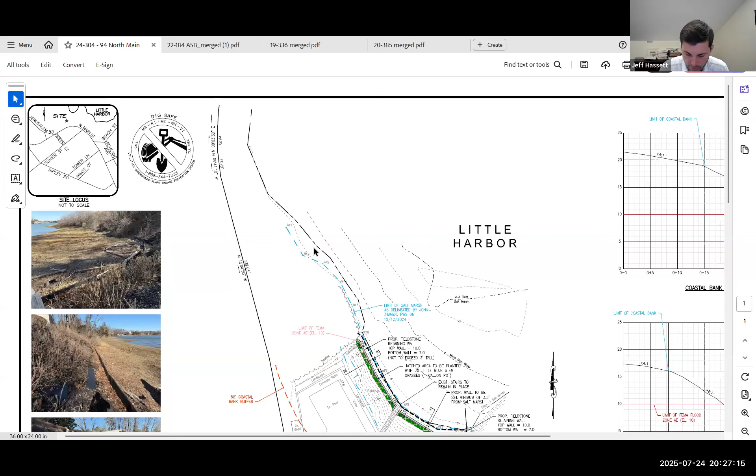That frontage of 590 feet extends all the way to the cemetery. But the area where they've been battling erosion is approximately 110 feet long, located immediately down gradient from their pool area and home.

They've made a number of attempts to stabilize that bank with vegetation and a geogrid. They tried to do a makeshift 2x12 wall, which you can see in the photos here. But it's in the southwest corner of Little Harbor, so it gets all of the wind and the most wave action.

And all the debris washing up there anytime you have a nor'easter. So what the homeowners would like to do is construct a 3-foot tall fieldstone wall at the toe of the slope, because it's really only the toe of the slope where there's constant erosion.

And where that will cut into the slope slightly, so that'll be a net even cut fill. All the work is up gradient of the salt marsh, so it's adjacent to it, but the work will not go into there.

On the site plan, we have 4 photos of the area showing the erosion, where constantly when you have full moons and storms, the water comes up to that bank, creating the erosion. So the resource areas are obviously coastal bank.

This will be a temporary disturbance, but done so to permanently stabilize the bank. The area is land subject to coastal storm flowage. There'll be no loss of flood storage capacity because it's an even cut fill, and again, the work is up gradient of the salt marsh.

So since our last meeting, we had a site visit. We submitted a revised plan dated, I think, July 21st. And we made 3 changes.

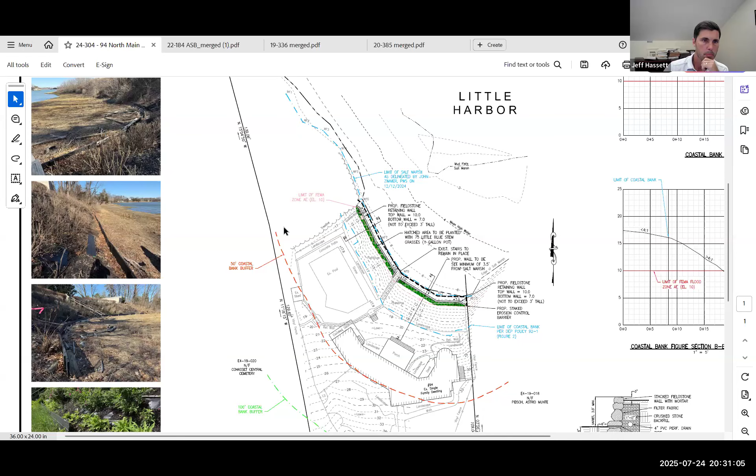Is that right? No, there's really not a wall. He had built a wooden wall in front with 2x12s staked in. Here's a photo of the bottom of the bank, you can see that wall. That was a wooden wall, and it's just a slope. No, there's no existing wall, other than the planks that he's put there too.

But we weren't seeing erosion on either end, and if they began to see some erosion right at the end of the wall, they could place some riprap, I suppose. But I don't think that's going to be an issue, to be honest. I think the way it ties into that wooded area on either side, it'll work fine.

I'd be concerned about the bank itself. If the wall is overtopped and you have a bad storm or something, you could lose a lot of bank there. It's just not something we'd want to see dumped into Little Harbor.

Okay. Steve, any comments? No, I think the plan was actually a pretty good one. I'm not sure I understood Tom's comment about the wall being overtopped. I assumed that if the wall weren't there, then a bad storm would erode that bank anyway, so this might help prevent it, as opposed to in most cases.

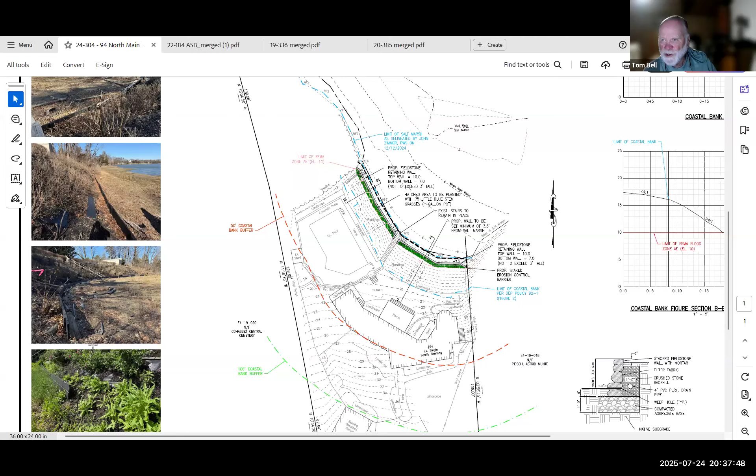So I move to issue an order of conditions for NOI 2512, 94 North Main Street, for construction of the wall at the existing coastal bank. With the conditions that we should have asked Charlotte whether you have a list of conditions. I'm sure you do, right? Sorry, Tom. Yeah, you might have to reread your motion.

That's all right. So since we were out at the site, I didn't see too many of the salt marsh flags still there. So if possible, that would be my recommendation, that the salt marsh be reflagged as necessary prior to construction of the wall, just to ensure there's no encroachment into the marsh, and per the site plans that there's at least the 3.5-foot distance or greater between the wall and the marsh. Any site work on the wall shall be limited to the landward limit to the maximum extent practicable. No traffic on the marsh is allowed, except as needed during low tide conditions only.

Any damage to the marsh identified from construction shall be assessed by the agent to determine if any restoration is required. All site work for the retaining wall and plantings on the coastal bank shall be done by hand. No heavy machinery is allowed in any wetland resource area for permitted work under this order. No materials or equipment are allowed to be staged or stored in the marsh or within the coastal bank for any period. The limit of work shall be inspected along with erosion controls by the agent prior to any site work.

That sounds good to me.

I move to issue an order of conditions for NOI 2512 with the previously stated conditions, as entered into the meeting notice by our agent. This is for 94 North Main Street, to construct a fieldstone retaining wall to stabilize the existing coastal bank.

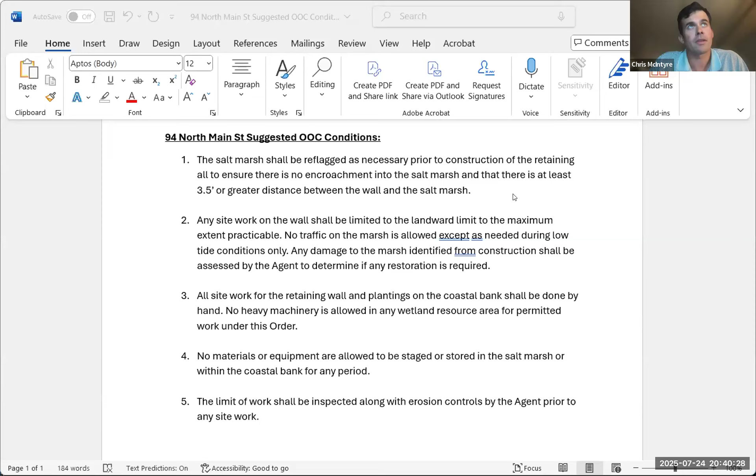Tom Bell, aye. Steve Magnell, aye. Kathy Berrigan, aye. Sanji Fernando, aye. And Chris McIntyre abstains. That vote passes 4-0-1, as does the original motion. Pass 4-0-1.

Thank you, Jeff. Thank you very much. Good luck. Thanks, guys. Thank you.

That's it for hearings. What do we have for tonight? We have continued hearings for NOI 25-13 for 94 Black Horse Lane, and we have a series of certificates of compliance.

First up, we have stormwater permit 25-0547, 24 Jerusalem Road. Anyone for that? Charlotte. I was actually going to say, Mr. Chair, can I go a little bit out of order because we do have the owners for 102 Howe Road on the call, and I don't see anybody else in the audience for the other two. Yeah.

Okay, so for NOI 21-2, 102 Howe Road, Janowski and Curran.

Awesome. Okay, so there were a couple revisions to this plan. I don't know how many of you guys saw the original in 2021 and then amended in 2022, but this was a new development for a single family home.

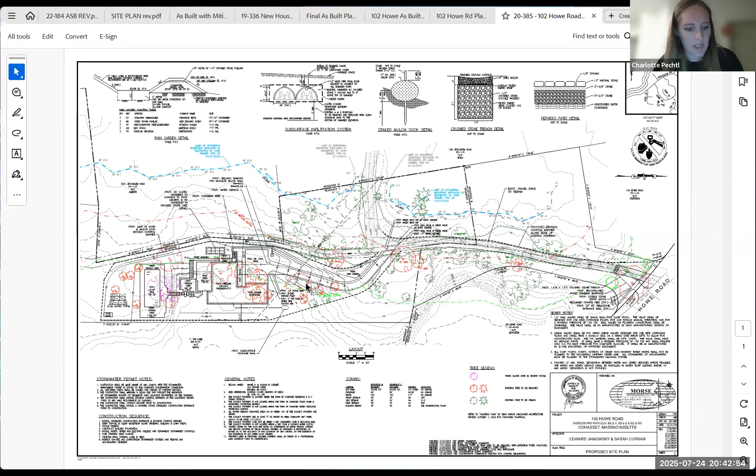This slope, when I looked at it in the fall — sorry, just trying to zoom in here — this area near the rain garden and the slope below the driveway, it was eroding. There were some storms at that time, but a lot of the mulch from these landscaped areas was spilling off.

So I recommended adding more plantings to this area. Since then, they did add more shrubs and native shrubs and grasses to the slope. It looks really good right now, and it should fill in more with the next few growing seasons. The rain garden is fully stabilized now.

With that being said, we did identify 2 trees that came down on this side of the driveway that were proposed to remain. So I instructed the landscape architect to work with the owner to locate an area to put some of the trees at a 2-to-1 ratio. This area in the 50-foot buffer is pretty tight with ledge and limited soils, so we are trying to target this area in the back.

As you can see, the 100-foot buffer is a little limited in this area, so we had minimal space to work with. We tried to put these trees in this 100-foot buffer area as best as possible because there were already trees planted in the 50 near the gravel driveway turnaround. Out at the beginning of the driveway it's all woods, and then you're outside the 100 here, so we tried to get these trees in the 100 as best we could.

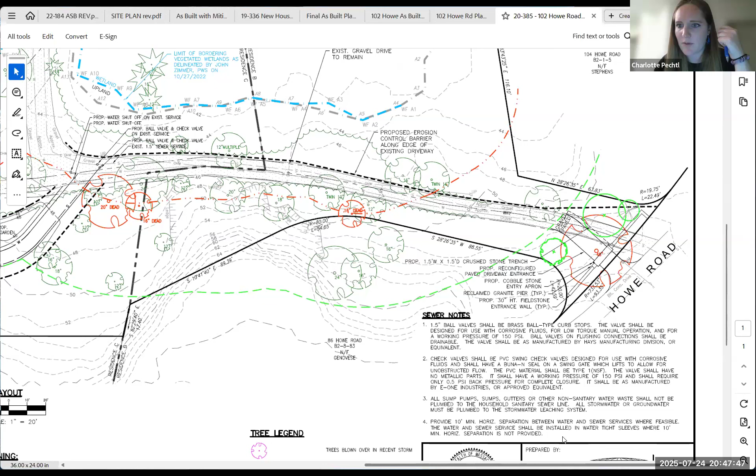This is just outside the 100-foot buffer. They basically only went up to the cobble apron. So it's paved here, then there's a stone cobble area, and then it's all gravel from here.

The western portion of the property below the driveway, outside the limit of work, was disturbed from the amount of blasting and tree removal from National Grid. So I worked with the landscape architect to restore this area, add more plantings on the slope, and put in a native seed mix behind here. This is all just outside the 50-foot buffer.

I mentioned the 2 trees came out, and I'll show you where we tried to put those to the best of the space limitations we had. Then 2 of the existing trees, this 12-inch tree and this 24-inch tree - the 24-inch tree was mostly dead before construction and is now completely dead. The 12-inch tree was alive when I first saw the site, but it did die. I'm not sure if it was already on its way out or if it was construction related. There were a lot of vehicles moving in and out of here, so I'm not sure what happened to this tree. The applicant has not taken the trees down. Just wanted to note that 2 trees unfortunately did not survive, but this one was mostly dead before construction.

The gravel turnaround parking area is in this 50-foot buffer, and I can go to the as-built. It's wider than it was originally shown, but the tree line has remained the same. It's just that more gravel was put in this area.

The fencing for the pool was extended a little bit past the property line. I did speak with Ed, and he said he talked to the neighbors, and they are okay with the fence in this area. I can show you pictures if needed, but it's only in the woods, so no additional vegetation was taken out - it's just a metal chain link fence installed at the bottom of a little slope here. The owner said the abutter told them they are okay with this fencing remaining as is, so there's just a slight deviation there in the 100-foot buffer.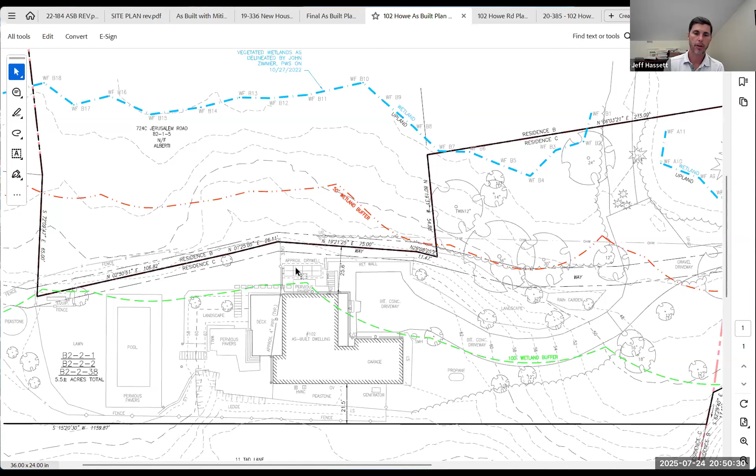No, we don't have any photos, and I spoke to the contractor about it going in. It was on an old phone that we lost everything on. I'm really shocked I didn't see this because I've been to the site so many times - I'm shocked I wasn't called out for the infiltration system, but it did change hands at some point, so maybe that's why.

More native shrubs went in along this landscape slope than the original design, given those concerns with erosion. A native grass mix was installed at the toe of the slope below the rain garden and the slope area here. I can show you pictures - it is now fully stabilized.

In terms of some planting deviations, there were a couple. These 3 trees here - there was a Norway spruce on the plan and 3 eastern red cedar. The 3 eastern red cedars were substituted with arborvitae, which I think is eastern white cedar as their common name. So there's 3 arborvitae here instead of eastern red cedar.

Other than that, there's an additional red maple - I can go to my markup of the planting plan. This was one of the mitigation trees; we put in an additional red maple here in the 100-foot buffer at the top of the driveway. All these trees that you see in green were planted per plan. The trees originally proposed in the 100-foot buffer, with the exception of this magnolia which was moved over here, were all planted in the 100-foot buffer. We tried to stick the mitigation trees in the back here as best we could, but given this 100-foot buffer line, which pretty much goes up to the property line, there's very limited space to put the trees.

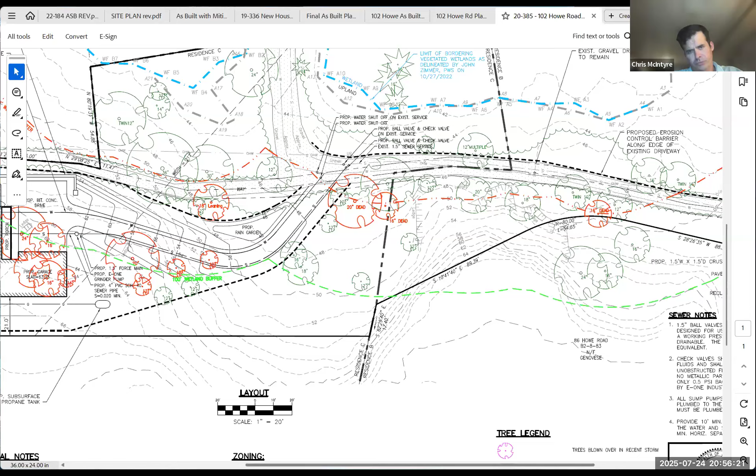Well, I'd say let's replace that 12-inch that wasn't protected. I don't have any other comments. And Tom? No, I don't have any comments. Kathy? No comments. Steve?

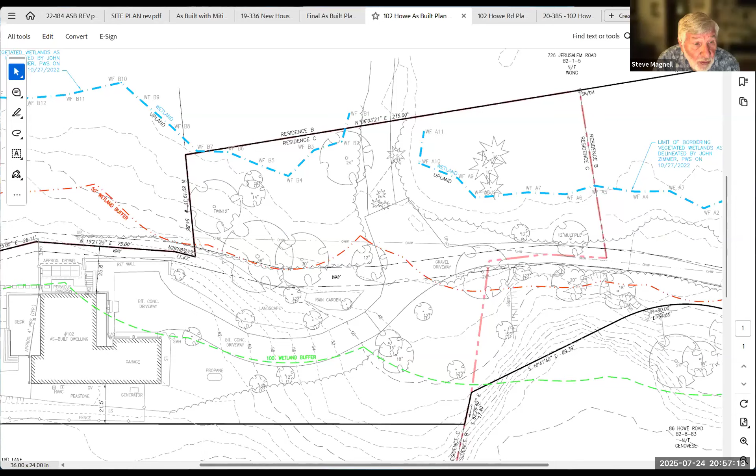I have a question about the thing that shows there's a way that runs beside the house - is that being allowed to grow over? Sorry, where, Steve? As the driveway comes up and where the turnaround is, there's a way. It's actually an old carriage path that runs all the way through the woods. Yeah, that was the original driveway, a big carriage path that ran all the way over to Lambert's Lane. I was wondering if that's just being left to grow over at this point. Yes, since they ran their fence around it.

Yes, I can pull up photos, but this whole area is stabilized with a native seed mix. Then this slope just above and below the driveway is planted with native shrubs, grasses, and there's trees at the top. And then the rain garden has one tree, several shrubs and grasses.

The path itself is just being allowed to overgrow. Yes, this is within the no-mow native seed mix. This area here was stabilized.

That's it, there's no question. I wasn't involved in this. This is before my time.

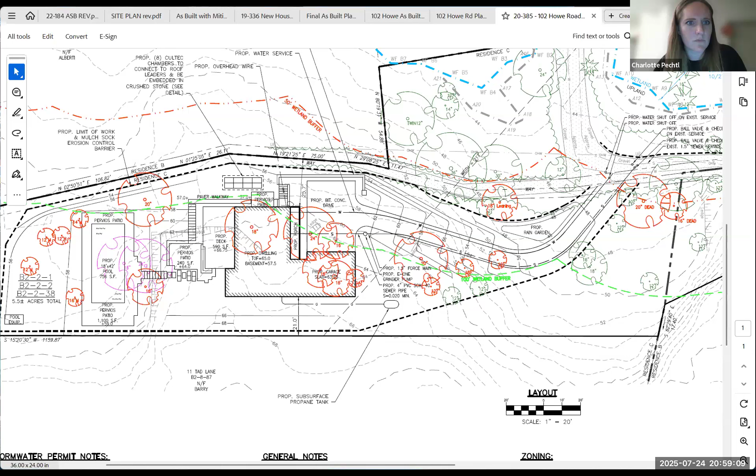Okay, good, I'm good with those. Jeff, you good with replacing the tree, 1 for 1?

Well, I believe the property owner is on the call? Yes, I think I'd let him speak to that. Yes, hello, I'm here, this is Ed Janowski, and Sarah Curran. Hi Mr. Janowski, so the tree that died during construction, we would request a 1 for 1 replacement of any trees lost within the 100 foot, which seems to be the case here.

If you're good with that, we could proceed with approving this COC. Sure, we'll be happy to plant the tree. Great, okay.

Then with that, and with the conditions as outlined by Charlotte, I'm guessing you're good with those. Yeah, sorry, it would be 40, 41, 53, and 56. Do you want to pull them up so we can see them? Oh yeah, sorry, I just closed out of that.

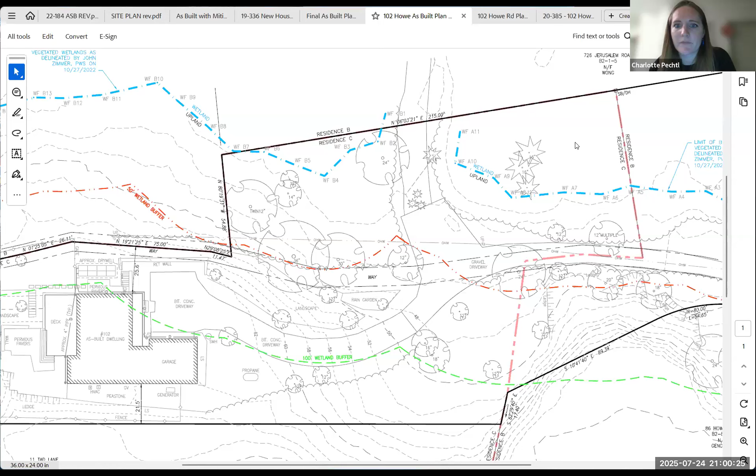So 40 and 41 are issued with pretty much every COC: no chemicals or pesticides in the buffer zones, and the plantings have to survive 3 full growing seasons or be replaced. We give you that general maintenance instruction upon issuance of a COC to maintain those plantings. Then 53 is in terms of maintaining the gravel driveway to be 10 feet wide, not exceeding that. And 56, this is a handout I can give you, but it's basically the BMPs of how to maintain your pool and what to do with pool drainage and things like that. This is also a standard condition if there's a pool involved in a project.

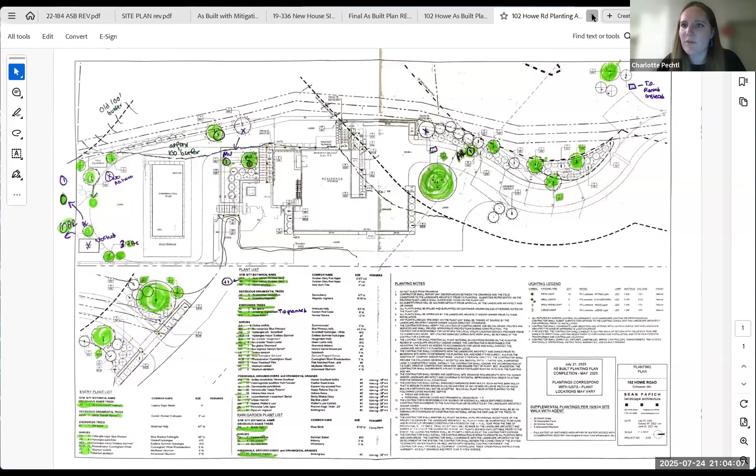No, I think it's just, I don't see anybody else, right, Jeff? I don't think anyone else was expected to call in. Oh, you're muted. Someone left in the audience. There is one person in the audience. I don't think it's the applicant. Okay, well, if they have questions, they can raise their hand.

So 724 Jerusalem, this is just a stormwater permit, no wetlands for the site. So this was the approved plan, raze and rebuild of an existing single family home and a detached garage. So this one has the contractor has recorded the long-term operation and maintenance plan, so that's actually all set.

This is a common deviation, but I'll just say for these 3 stormwater subsurface systems, I just couldn't see the inspection ports, and I will say this happens pretty much at every site. So I just talked to the owners and said, for long-term maintenance purposes, you really want to uncover those, and you can put a green grate over them so it blends in with the lawn. And it's just necessary for inspection checks. So I don't see it as an issue for the project. It's just something that I note every time, especially if someone's putting in sod.

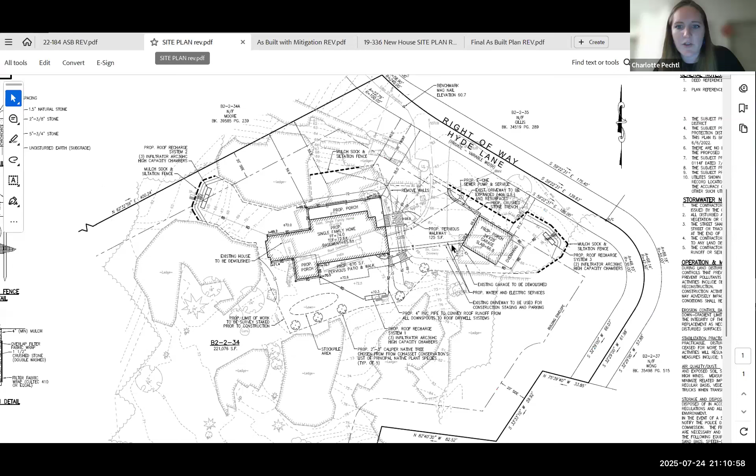Sure, that stone trench is actually twice as long as proposed. Oh, it is? Oh yeah, I'm sorry. Was it only approved shorter than what was there? Yeah, we had it only proposed at the top of the driveway where they're expanding it, and then when they built it, they went all the way down to the right of way. Oh, okay, so hold on.

Where's my as-built? There it is. Oh okay, so you did make it longer here. Got it, okay. So yeah, 200 square foot larger driveway, but there is a longer infiltration trench. Final grading for the garage dry well, which is this one right here, is just a little bit higher. It was elevation 66, which the approved design was elevation 65. So I just wanted to make sure there were no impacts to the rate of infiltration, and Jeff confirmed that was not the case.

The rear patio pavers are just a little bit smaller than the approved design, and there is a pervious deck over it, but since it's pervious, there was no increase in impervious area here. Eastern walkways are just a little bit reconfigured here. The roof drains are only connected to the western section of the house, to the western infiltration system. I think that's a little bit different of a reconfiguration, but Jeff did clarify that the entire roof area is still directed into the dry wells, so it's not like there's any roof area that's not connected. And there aren't any downspouts in the northeast corner here, because the house is sloped in the other direction, so all the runoff is still going into the dry well systems per plan. It's just a slight reconfiguration of where those roof drains are.

The as-built plan does show a little bit of modified grading with the western chamber here, but it's at a slightly lower elevation than proposed, so it doesn't seem to be a concern because it's still going where it needs to go, and Jeff didn't have concerns there. With this permit, there are no ongoing conditions other than our regular template, that all stormwater management systems have to be perpetually maintained. And there was no pool, so we don't need the pool best management practices with this one.

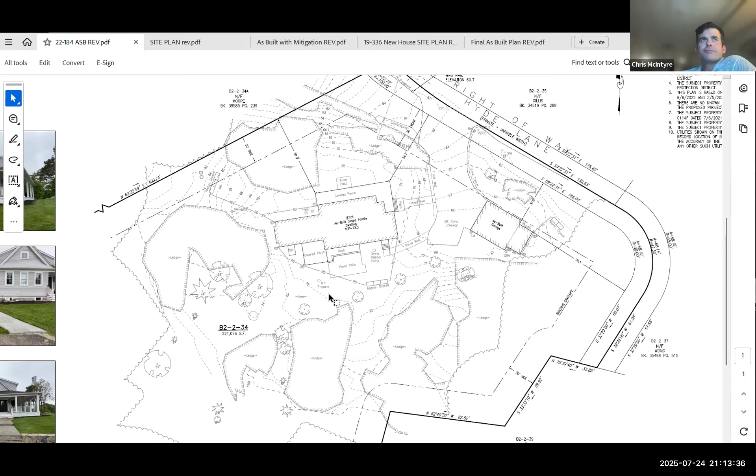Second. Right, with a motion and a second, then I'll take a roll call vote. Tom Bell, aye. Steve Magnell, aye. Kathy Berrigan, aye. Sanji Fernando, aye. Chris McIntyre, aye. That vote passes 5-0.

Thank you. All right, last one: 68 Whitehead, NOI 2113 and stormwater permit 2110.

There's a couple revisions to this plan. This is the final version before the most recent one you guys saw. This was like half, mostly completed as-built actually. I just wanted to show you the 2023 plan for reference, which was approved in amended conditions. This site is also fully stabilized, landscaping fully installed. The most recent revision to the plans did include... oops, sorry, here's the approved version.

Where is it? I don't know why I'm not seeing this. I don't know why the mitigation isn't here, but yeah, so this is the mitigation plan. We had to put 2-to-1 replication of 2 trees that were removed, so 4 eastern red cedars went in at the bottom of this wall, along with several shrubs and grasses. This mitigation area, I can show you photos, is 100% installed. The trees look healthy, they weren't misplanted in any way.

So with that being said, this was the approved plan minus the mitigation. I will also work with the applicant to record the long-term operation and maintenance plan prior to the issuance of a stormwater COC. This order of conditions, aside from the standard conditions, only had one special condition: that if excavation of the stone wall compromises stability of the existing trees—they're talking about this stone wall in the back here—the trees will need to be removed and replaced with native trees. So even though the stone wall may not have compromised those 2 trees coming out, as we previously discussed in the amended order, the barriers were moved after they were staked out.

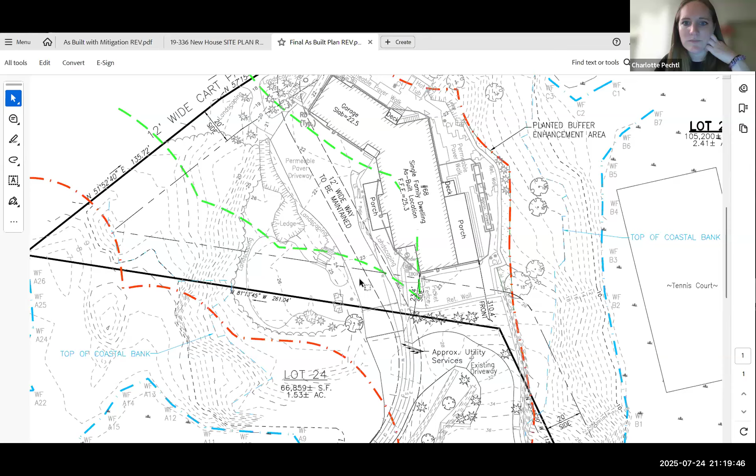Was the driveway originally pea stone?

Okay, so how is that a trade-off that it's pervious, but they didn't add the trench? Like, what's the, did they do a calculation or?

So they've installed the pavers to be permeable, so they have permeable joints and it's set on crushed stone with a reservoir below.

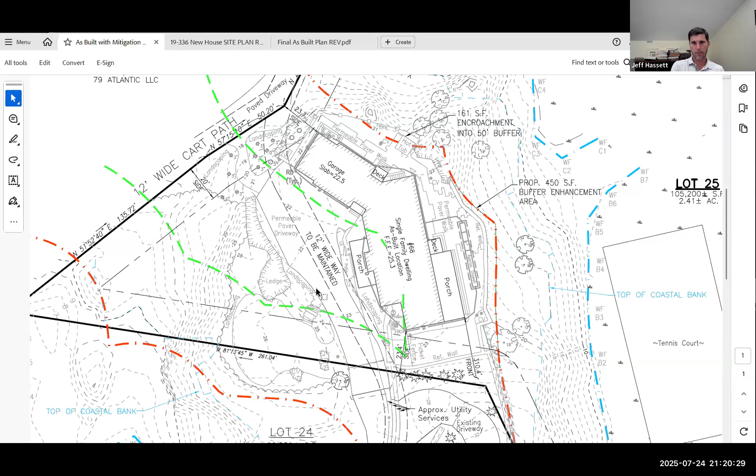I'm not aware of if they did the stone trench. It's not visible anyways, but any runoff that would run off in that area, there's a mulch bed and it's a low point. So if any water did run off from that driveway, it's going to get caught in that low point in that mulch bed and infiltrate. There's really no way for it to run off site.

Why was the trench proposed then, like, to begin with? Or was it, why was it there? I don't recall, but I mean, I've been out there and there's no runoff from that area. The water's going to capture in that mulch bed and infiltrate. I mean, realistically, that whole paver driveway has stone underneath it.

So the plantings are good. They said there's more, they did more. Yeah, so they did plant the amount of minimal trees that they were supposed to in the 100-foot buffer, and then there were these arborvitaes that they planted in this area. So 1, 2, 3, 4, possibly 5 of them are outside the 100, but about 4 of them are inside the 100-foot buffer. So overall, in terms of tree count, not counting the mitigation plantings, they planted 4 additional arborvitae in the 100-foot buffer.

Yeah, the proposed plan had fairly light plantings. It only proposed 18 shrubs. Yeah, and this 18 was far more shrubs than that. 1, 2, 3, 4, 5, 6, 7 trees total, only 5 trees in the 100-foot buffer.

Any comments from anyone else? Sorry, Jeff, were you gonna say something? I was just gonna say they had Sion Landscaping doing the whole landscaping, and it's heavily planted.

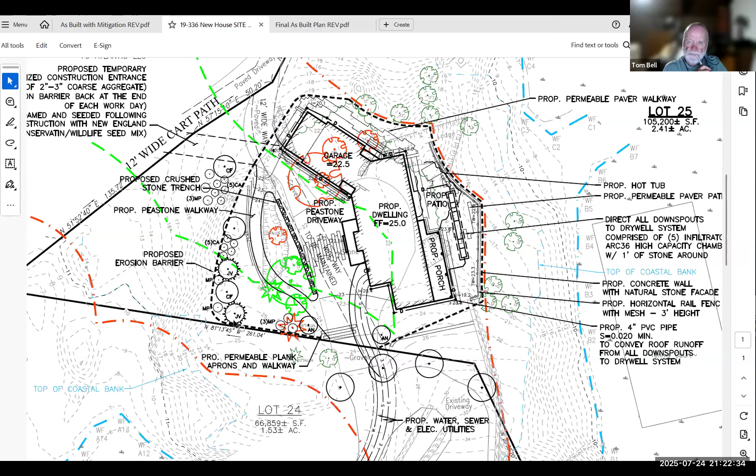Anyone else? Steve, no. Kathy, no. Sanji, no.

All right, Charlotte, proposed ongoing conditions, anything special? Just number 40 and 41, and like I mentioned, the pool BMP's ongoing condition will be a template in the stormwater COC. This was an older template before they added that to the order conditions.

Okay, all right, well then, with that, I will make a motion to issue a certificate of compliance for NOI 21-13, stormwater permit 21-10, with the ongoing conditions noted by Charlotte for the pool, and 40 and 41 in our standard conditions for 68 Whitehead Road.

Do I have a second? Second. With a motion and a second, I will take a roll call vote.

Tom Bell, aye. Steve Magell, aye. Kathy Berrigan, aye. Sanjay Fernando, aye. Chris McIntyre, aye. That vote passes 5-0.

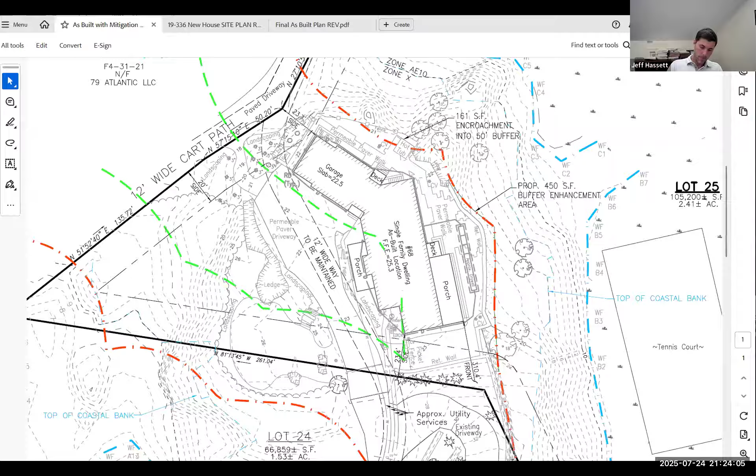All right, that's it for COCs. We got some agent updates, Charlotte. Sure, yeah. Also, really good job on time, guys, love this for us. So construction updates, I just have a couple.

The Hingham Lumber project has started. I've been out to the site twice, inspected the limit of work and erosion controls. They can actually potentially save, we'll see how construction goes, but some trees at the bottom of the infiltration basin. The contractor thinks he can save them. I think it just depends on grading. So I told him, don't cut them for now and save them, and if we can, that'd be great. It's about 5 or 6 of them. So I guess we'll see how that goes.

44 Little Harbor Road, we'd already voted on COCs, but I just want to let you guys know that they did put in the rest of the 8 trees that we had wanted to see go in contingent upon the COC. So he did plant them in the lat-long coordinate locations in the yard because they were originally taken out in that area. So I did inspect those and gave them their COCs.

And with that being said, COCs, as you can see, are getting quite exhausting. I talked to Chris a little bit about this before the meeting, but you guys know I'm just the messenger. I'm just reading through these, and I don't know if there's any better way to require more information for these, because one thing that I'm finding when I'm going to these sites is I'm spending a lot of time in and out of the office and on the site, counting plantings, double checking as-built, having people add more information to as-built, talking to owners. It's a pretty exhausting process.